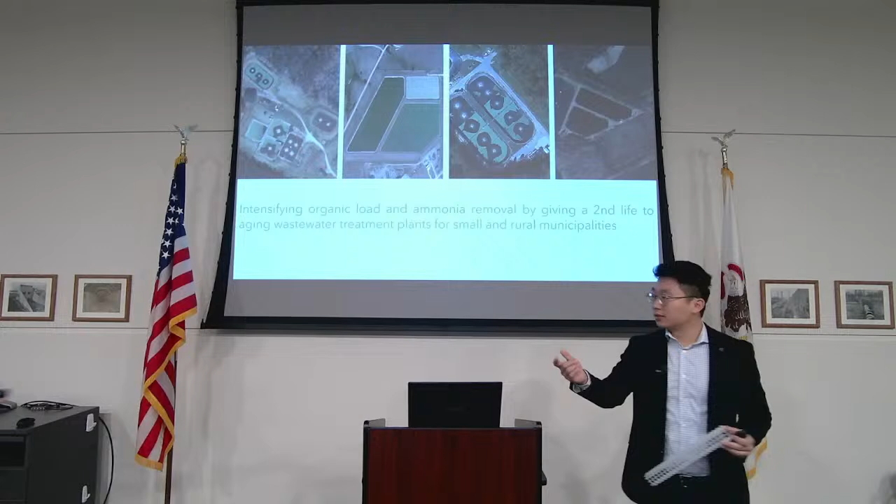I guess it's okay to stand out. So, we're specialized in biological wastewater treatment, and what I want to talk about today is how to help. So what I want to talk about today is how to help small and rural communities when it comes to their wastewater treatment plants, and more specifically, how to help them upgrade their plants to meet with higher capacity needs or changing regulatory compliances, while giving a second life to their existing installation.

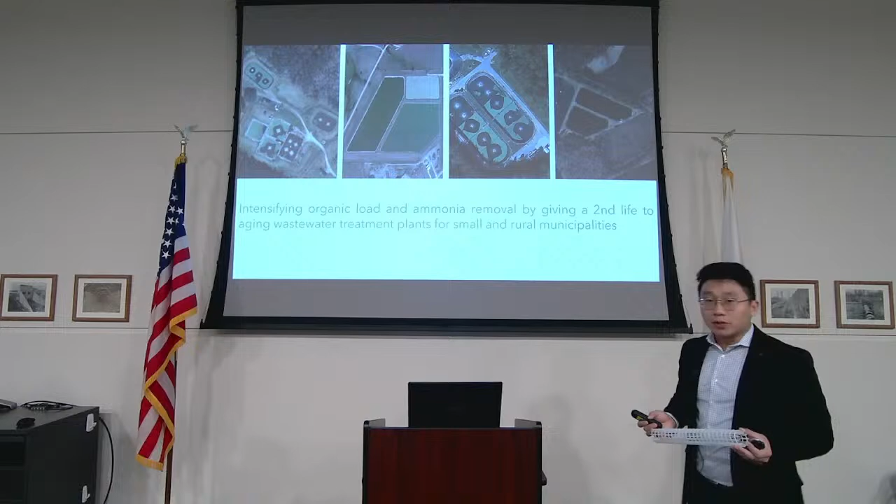So when it comes to small and rural municipality, one of the most common ways of treating wastewater is a lagoon system. It's very simple, cost-effective, and low maintenance as well. I think there are over 10,000 lagoon systems across the US, and over 3,500 in Canada as well, actually.

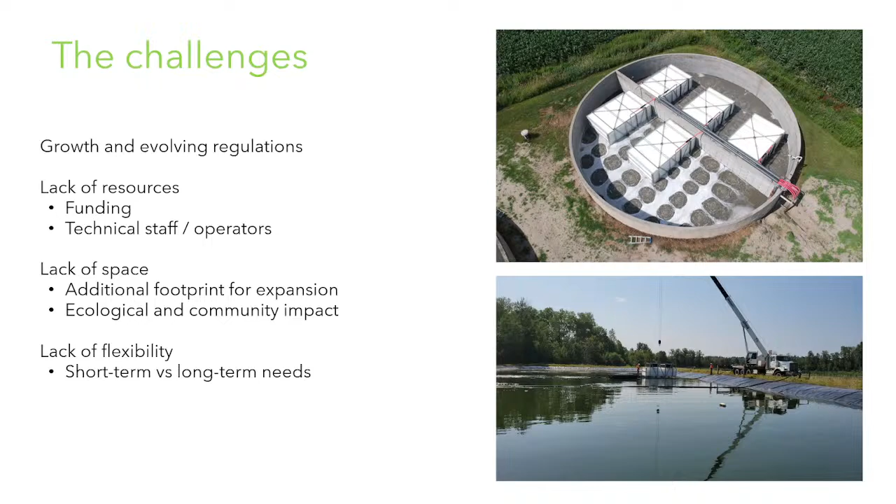And when it comes to upgrading those plants, some of the conventional methods of doing so, such as a conversion to a mechanical plant, an MBBR, or another system that would replace the lagoon process, will have some pretty unique challenges for those municipalities. First of all, the lack of resources is a big one, right? It takes a lot of capital cost to do those upgrades, and the lack of human resources as well. Often when you go with a more complex process, it takes more qualified operators to do so.

The lack of space could be a big factor. Adding footprint will remove from green areas around the wastewater treatment plant and could have ecological community impact in that way. And most importantly, I believe, is the lack of flexibility. When you make permanent infrastructure changes to what you already have, you have very little flexibility. You pretty much have to design your upgrade for the next 20 to 30 years, whereas there are other alternatives that can allow you to give a second life to your existing plant that could provide you with more flexibility.

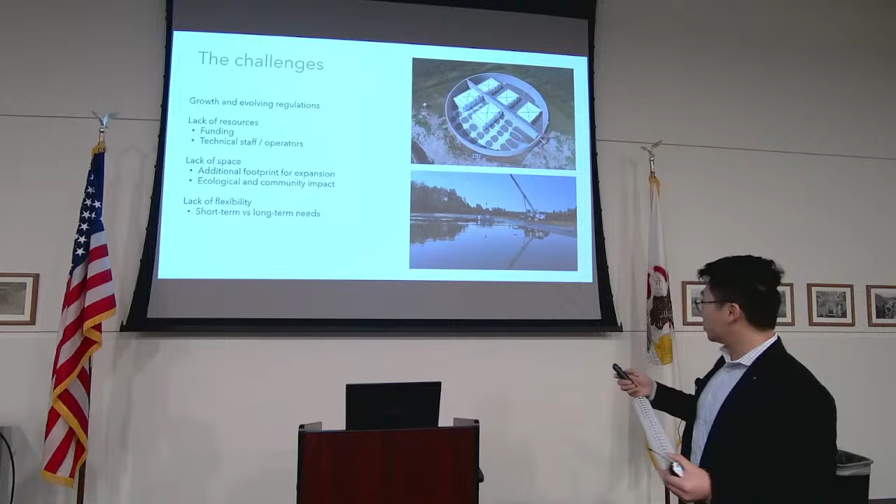So you can see a few examples of what I'm talking about here on the screen. So the approach that I want to talk about is to basically submerge modular fixed bed into an existing lagoon or an existing bioreactor to enhance and intensify the existing treatment.

All right, and like I said, not only lagoons, other types of bioreactor as well could be a good fit for this. You can see the first picture up there is a concrete tank. So there's different versions of this type of solution that's available for different types of bioreactors. But yes, lagoons are a great fit as well.

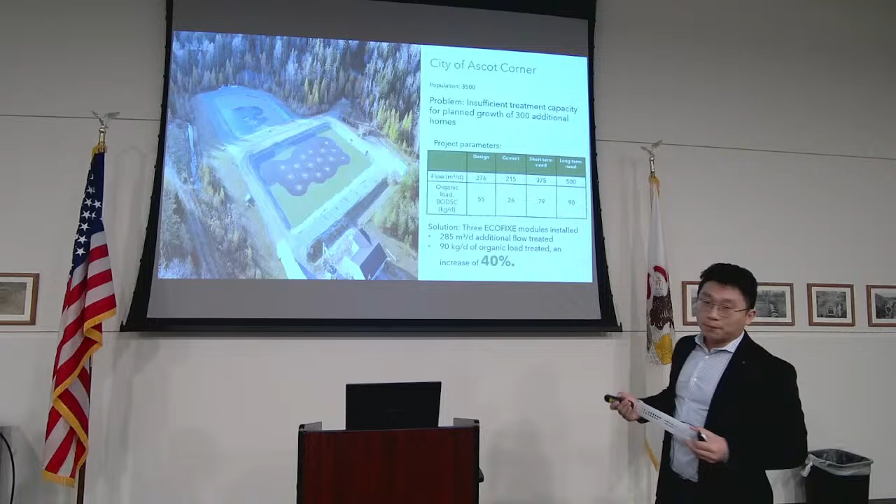And the city of Ascot Corner is a good example of what we discussed thus far. This is a municipality in Canada. They operate an aerated lagoon with 2 cells. It's a small municipality, 3,500 people. It's a pretty typical situation from where I'm from. And the issue is that they needed to increase their BOD treatment capacity by 40% to accommodate their growth, so 300 additional homes.

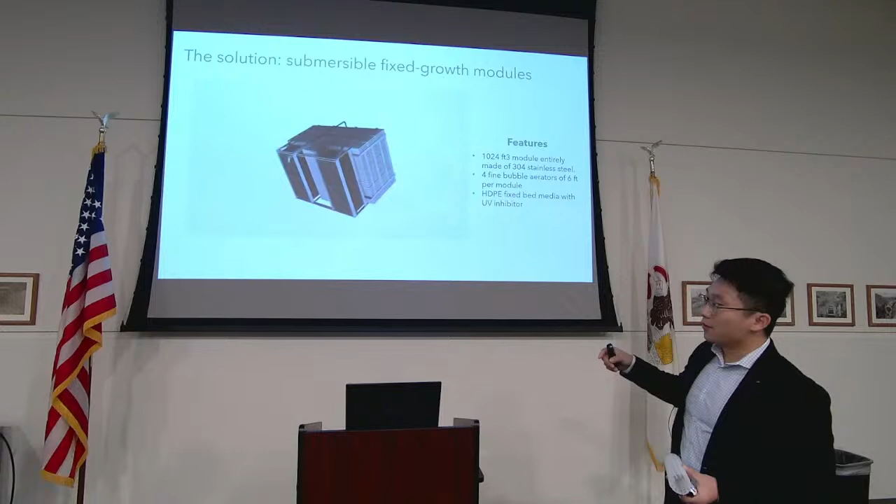So for the city of Ascot Corner, what they decided to go with is a modular fixed growth system, like the one you see on screen here. So I'm going to play a little animation. This module in particular is called the ECOFIXE module. It has an external structure made with stainless steel. The white section in the middle is the fixed bed media, which I have a piece of it right here. And there's also an integrated aeration system at the bottom of each module to feed it with air, but to clean it as well.

And the module itself is really simple. There's no mechanical parts on it. It's all stainless steel and plastic, so it's easy to maintain. And it was designed this way because it was designed for small and rural communities.

So this type of solution can be used to treat different contaminants. In this case, we're going to take a look at the BOD removal with the ECOFIXE module, as well as cold water ammonia removal with the BIOFIXE module. So both can be combined within the same installation if needed to treat both BOD and ammonia.

And how it works is really simple. You probably guessed it already. These are going to be submerged into an existing bioreactor to provide the biomass with a surface to colonize. So that's going to help the bioreactor maintain more biomass and treat more loads of BOD and ammonia, while at the same time optimizing the existing aeration as well, or to add aeration if there is none.

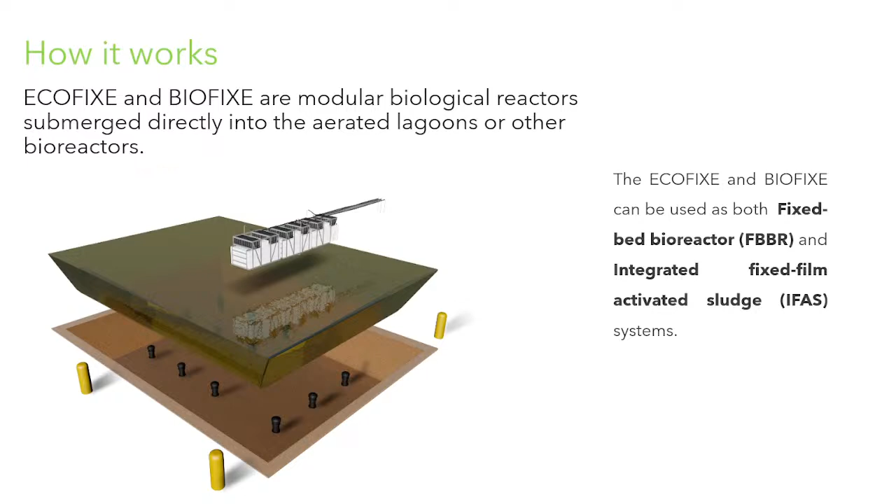So you see an example for an aerated lagoon here, where the modules are going to be submerged in between the existing aeration lines and then anchored with steel cables to the shore. So they're basically FBBR or IFAS solutions that come in a modular form that's been adapted to help small and rural communities.

As I mentioned before, there are different versions of this type of module. The anchored version can go into a SBR, activated sludge, with the same principles, whereas the floating version was designed for lagoons.

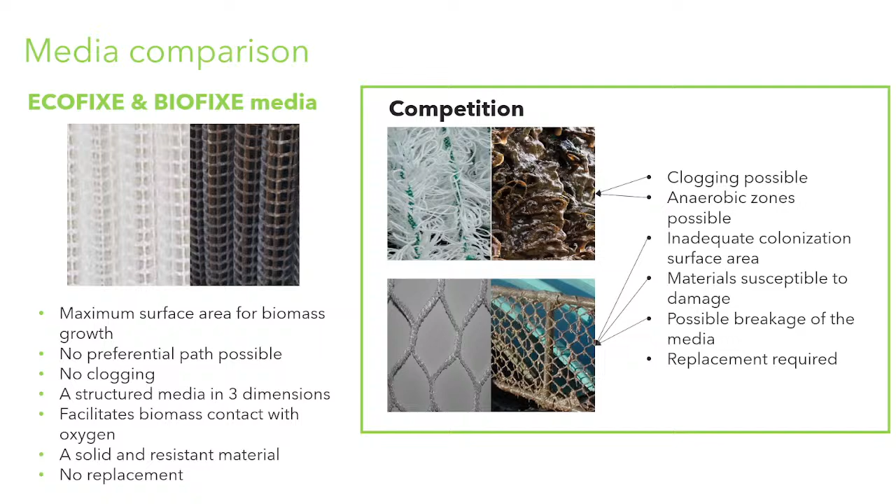So the choice of media material was very important for the city of Ascot Corner. Fixed bed media is nothing new, it has been around for a while. It's a proven technology, but the design of the media was often a weakness. Often you will be a strand or rope-like material, just like the ones you see here, which will be great for biomass colonization, but will create a lot of clogging as well.

So clogging will create anaerobic zones, will make wastewater bypass the treatment, create short-circuiting, for example. So that would require regular maintenance, and it's also material that could break over time, so it will require replacement as well.

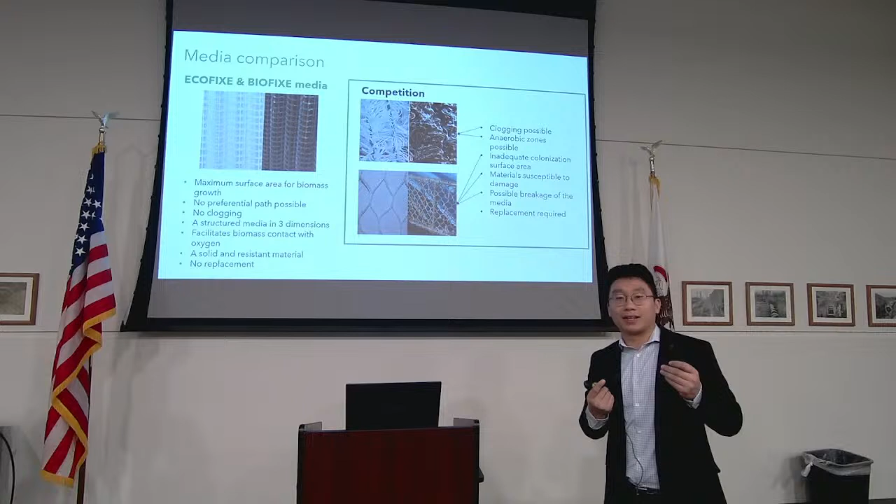So what we did with the Ecofixe and Biofixe media to address those concerns is that we made it in a three-dimensional structure. So it's a shape of a cylinder that has a lot of surface area for biomass to grow, but also plenty of space in the middle to avoid clogging. That piece of media is installed vertically inside of the module so that the aeration can hit it at the right angle to clean it. It's also a rigid structure made with a thick plastic, so it's not going to degrade over time, and you won't need replacement.

Now, when it comes to the integrated aeration system, it's used for a lot of different reasons. First of all, it's going to push air and oxygen into the media and the biomass to feed it, but also it's going to create an action zone. So that's what you see illustrated in red right here, basically increasing the surface area of the treatment to avoid short-circuiting and make sure that the entire flow of the wastewater is covered. Maintenance is also done directly through the aeration system.

So the modules will remain inside of the bioreactor. You don't need to remove them. And you simply need to adjust the aeration every 4 to 6 weeks to basically blast it with air and clean it, remove any debris.

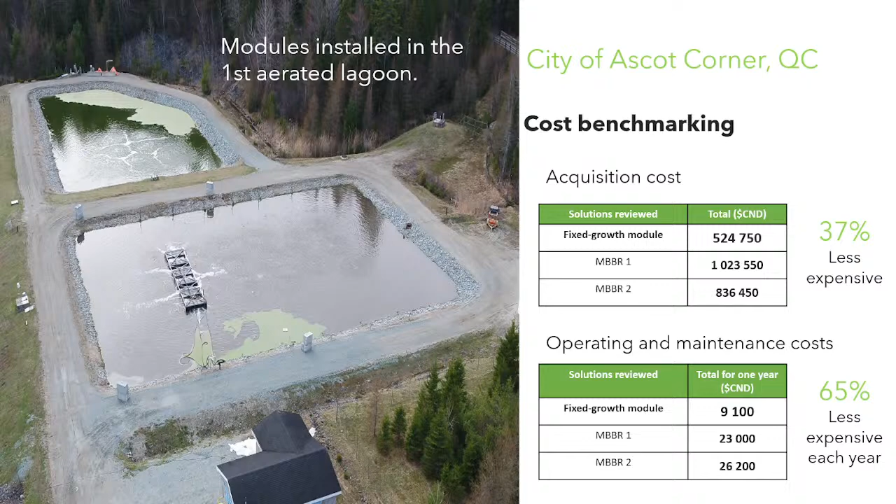So you can see the installation for Ascot Corner right here. So 3 modules submerged inside of the first lagoon. You can see that the line of module is perpendicular to the direction of the wastewater. We positioned it that way to maximize the contact with the wastewater, and that combined with the action zone will help treat the entire flow. Then the modules are connected to those concrete blocks with steel cables to keep them in place. And right here, you can see the manifold.

So this is where the connection to the air of the blowers will be, and also where the valves to adjust aeration for maintenance will be as well. In this case, Ascot Corner had existing blower systems and existing aeration system that had enough residual capacity, so the modules were simply connected to the existing aeration line.

An engineer compared the cost of the Ecofixe fixed growth module with a few standard MBBR solutions, and it came out pretty favorably for the fixed growth module, both on the capital cost and on the O&M cost as well.

For Ascot Corner, the economic advantages were pretty obvious. They were allowed to give a second life to their existing lagoon rather than add infrastructure or change it to a more complex process. So they save a lot of money in terms of the capital expenses and also in terms of the recurrent O&M cost.

Flexibility is a big factor as well. If we just go back here, you can see that the lagoon still has plenty of space to add more modules if they want. So not only will it help them with their current objectives, but in the future they can still add more modules in the lagoon, and even add Biofixe modules in the second lagoon if they ever have a more restrictive ammonia limit. That's a level of flexibility to deal with the changing regulatory landscape and your growth as well.

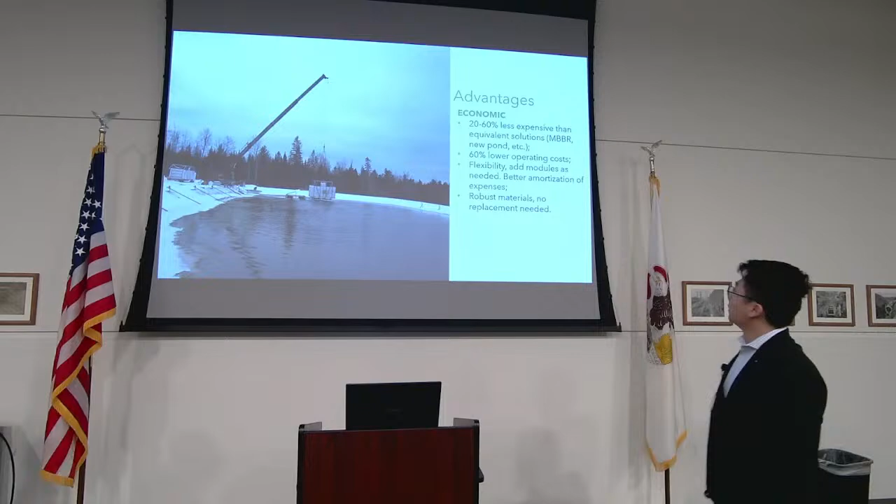So here you can see the assembly of...

It is really simple, and that's the goal, is to make it easy to operate and to maintain. Those blocks of media are made with those cylinder shapes that you saw, fused together with heat and then inserted into the stainless steel structure.

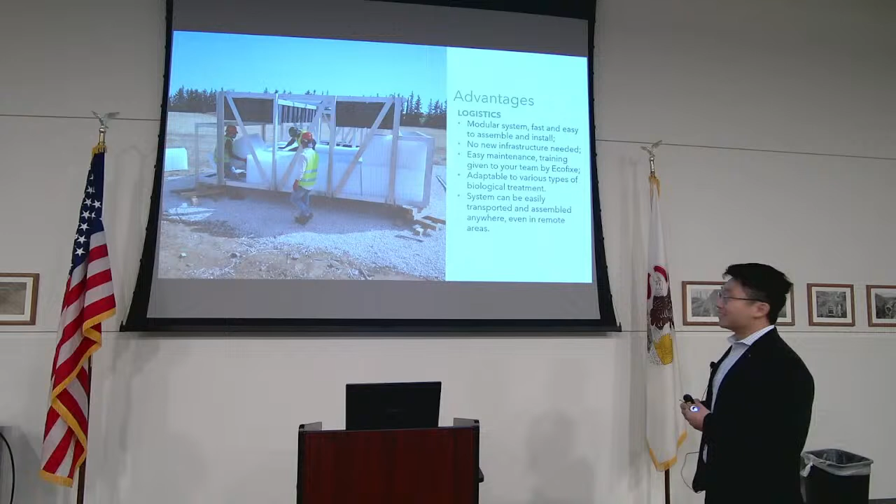Assembly and installation is a big plus as well, because that can be done pretty quickly, usually within a week or so, and without having to disturb any of the ongoing operation. Also, it is shipped in pieces and assembled on site, so if it's in a rural area, it will be easier to reach as well.

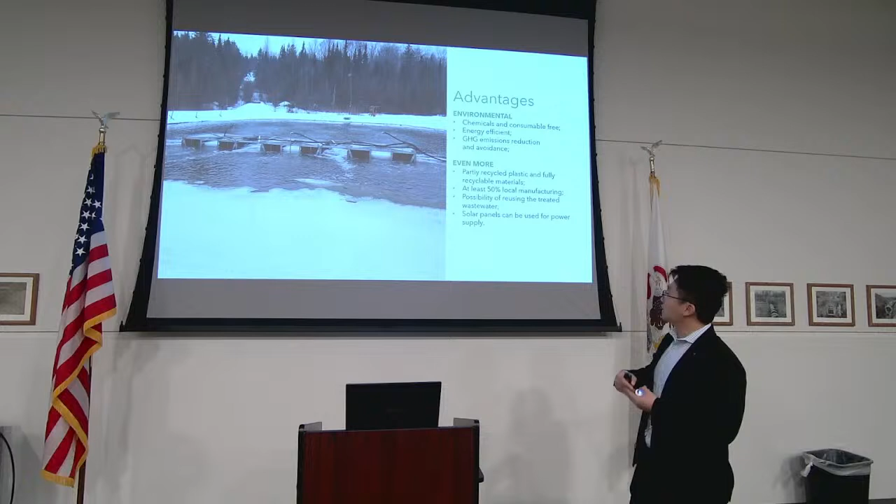You can see the module submerged here, as well as the aeration happening around it. And of course, by enhancing biological treatment, we're avoiding the use of chemicals and consumables, and it's very energy efficient as well, by optimizing aeration but also by allowing the bioreactor to maintain more biomass and treat more loads of contaminant per kilowatt of energy consumed. As you can see, there's not an issue here.

We've been having freezing weather the past couple of weeks here. This will continue to work. It's working in Canada, obviously, so freezing is not a factor.

Another important factor is that most of the material can be built locally. The media, obviously, is the proprietary part, it's going to be built in Canada, but the stainless steel can be built locally, and that's the majority of the equipment cost. So any BABA requirements, this type of solution can easily comply with.

Now, when it comes to performance, because that's the most important part, right? It can be easy to maintain, it could be simple, but does it perform?

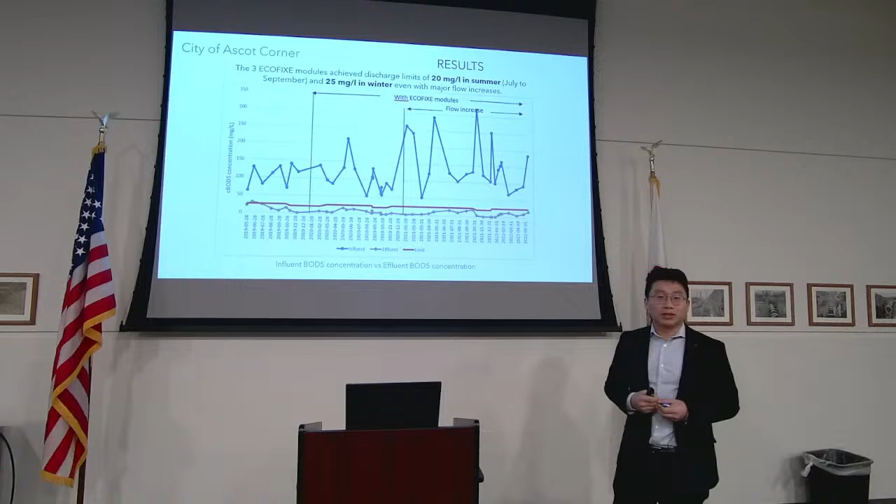Now, the good news is that the same three modules that were submerged into the lagoon were still able to handle the additional load and treat their BOD level at the effluent below their limits consistently — that's 20 milligrams per liter in summer and 25 in winter. So essentially, Ascot Corner was able to, simply by submerging those modules, increase their treatment capacity by 70%, and really reach their long-term goals without having to change their existing lagoon process or add any infrastructure.

Now, TSS could be a concern as well, but the good thing is that although the Ecofixe module was not designed for TSS removal, it does have a positive impact on its final results. That's because having additional biomass in the bioreactor creates a flocculating effect — the biomass attaches itself to the suspended solids and helps them settle down more efficiently, which improves the final results in that regard as well.

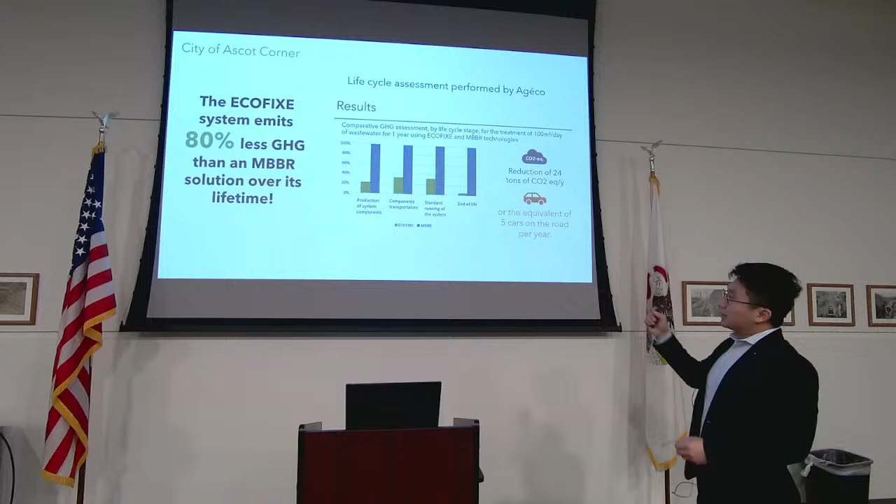So here is what's called a life cycle assessment. This is done by a third party to compare the impact on greenhouse gas emissions of the different alternatives that were studied. In this case, the third party found that the ECOFIXE system will emit 80% less greenhouse gas than an MBBR over its lifetime, so from production to the end of life, while considering infrastructure, energy consumption, etc. So it is a significant impact.

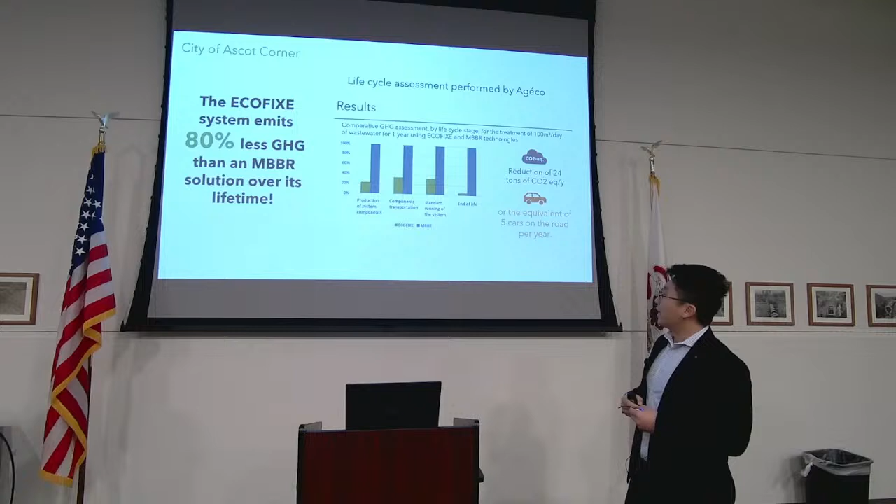That's the equivalent of 5 fewer cars on the road per year for every 100 cubic meters per day of wastewater treated. And not only does this type of study help quantify the impact on the environment, Ascot Corner was also able to get a very nice green technology fund from the government of Canada to fund a good portion of their project.

Now, ammonia removal could be a big issue as well, especially in lagoons in cold climate communities, just like in Canada. Here we have an example for the city of Drummondville, and you can see before they did anything to their lagoons, ammonia removal was quite a big issue, as their effluent was below the 5 milligram per liter regulation for only a couple of months during the year. So a lot of work to be done here.

And now after the BIOFIXE module was installed inside of the lagoon, after a quick ramp-up period, the effluent was lowered to below 1 milligram per liter consistently. And that's even during the coldest months of winter here, December, January, February. It gets pretty cold. Minus 20 Celsius, minus 30 Celsius is pretty common in that area.

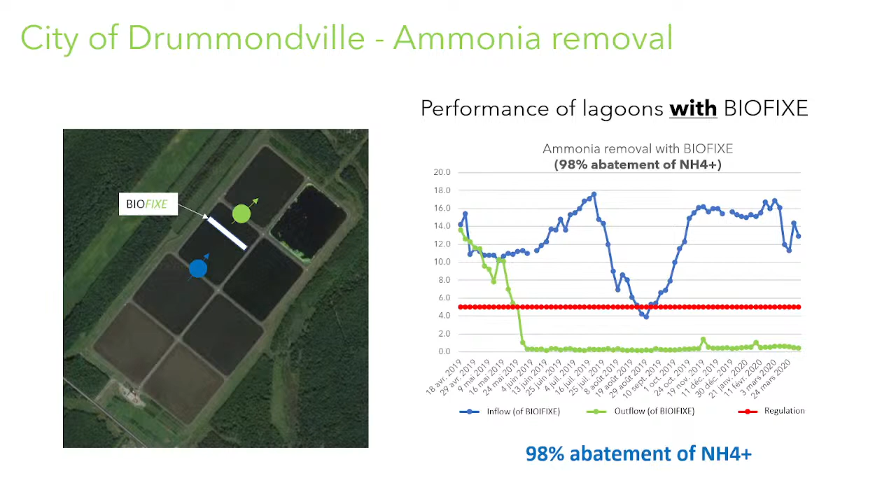Not sure what that is in Fahrenheit, but it's cold, trust me. Yeah.

So with the BIOFIXE, you can expect a removal rate of 98% or more of the ammonia load that's attributed to the module, and it can really allow the lagoon to maintain effluent below their limits year-round without heating the water. I should probably explain how that's done.

One of the things we did with the BIOFIXE is that we apply a coating of biogel on the media. That's something that was developed with research centers in Canada. That coating of biogel will protect the nitrifying biomass, but also increase the surface area for them to colonize. So this is the way that we're able to maintain biomass in cold water.

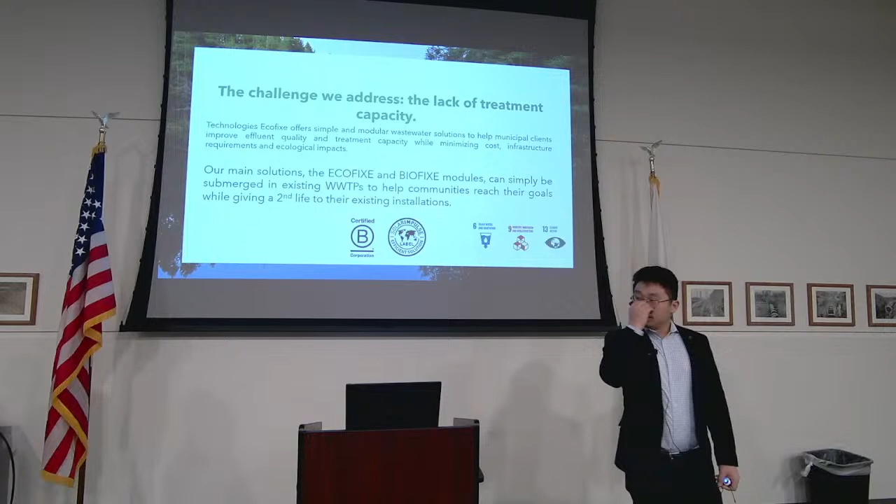So it's kind of like adjust and put a timer, go do something else, and then come back to it. That's why the maintenance is pretty simple, because the modules stay inside of the lagoon. You don't need to remove them. So all you're doing is reallocating which way you want air. Yeah. So it isn't going to take the air away from your operation? So are you going to upsize your blowers? I don't believe so, unless you had a larger capacity population, maybe.

My assumption, but we can always look into it if need be. It is a case-by-case analysis. In that case, it depends on what you already have, what you're trying to treat, and what your objective is. So it'll be hard to.

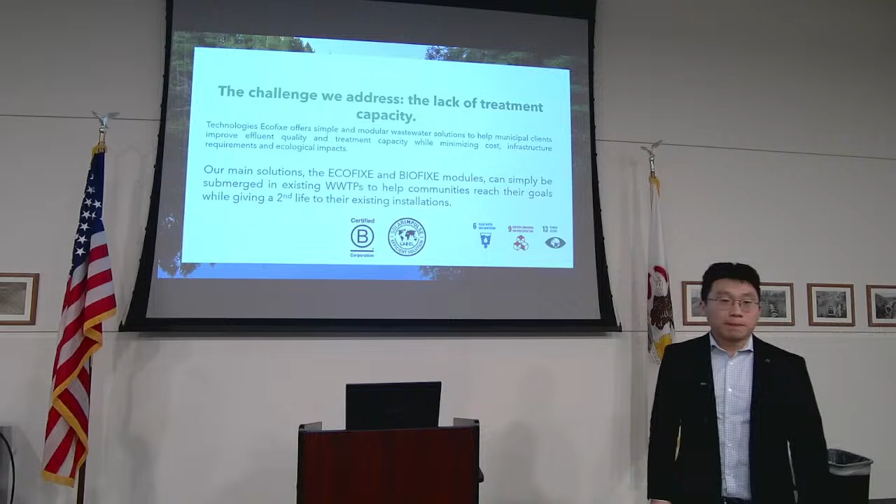Yes, sir. Now, normal operation is there constantly, right? Yes. Off, on, alternating. Constantly, yes. And it's possible to adjust it as well, depending on the season, right? Sometimes during spring, there's more pressure on the system. You're going to put more air. Maybe during summer, you can lower it. So that's all part of the operation and maintenance optimization to keep energy consumption low. Yeah, absolutely. So, all right, let's go back again.

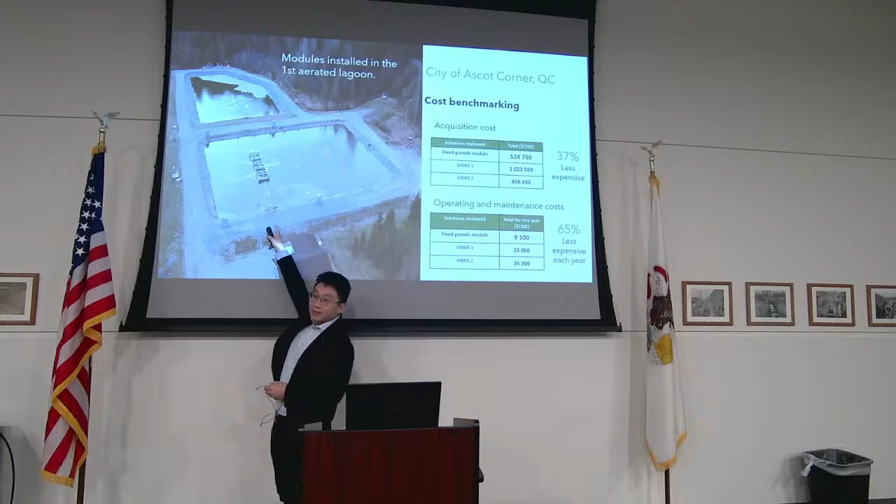So you see right here, this is the manifold. So this is where the valves will be. And then these will be connected to blowers. Yeah, there's 3 flexible hoses to feed the 3 units. They're connected to the same manifold, and then that manifold is connected to the blower.

So blowers could be provided as well as part of the package. And also, if utility building or space is an issue, adding a small weatherproof cabinet to house the blowers could also be an option, as long as there's electricity on site. Yes, sir.

Good question. No, not yet. Soon. We're working on it. So there are a lot of installations in Canada where the climate is really cold, so we have a lot of performance data from those for comparable situations in Illinois, and so the first installation in Illinois is still in the works.

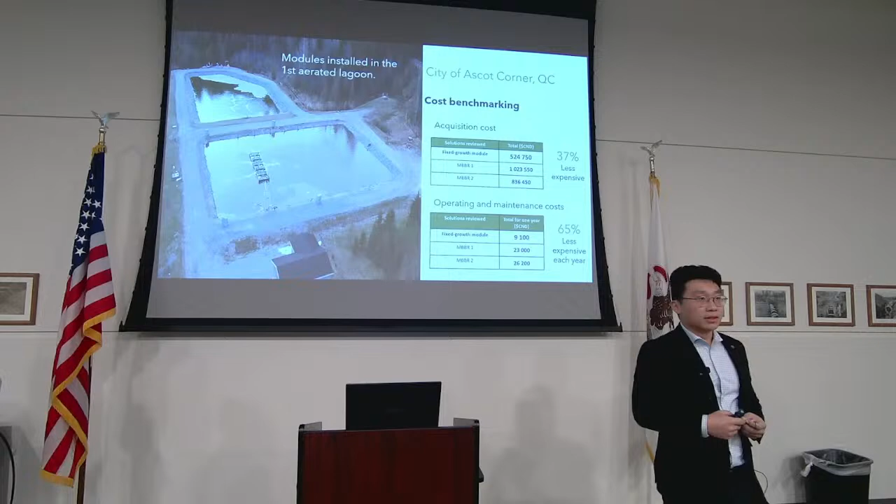That's a good question. So with any biological treatment process, removing the sludge before doing the installation is always a good idea. So that's not an exception for this type of solution. It will help, but it's going to depend on the sludge level. If it's still reasonable, then it wouldn't be an issue.

And the good thing with the floating module is that you have plenty of clearance between the bottom of the lagoon and your module. So if you're going in with a drag to remove the sludge, you don't necessarily need to remove the module from the lagoon. You can go under, or you can disconnect one of those cables, kind of move them around, and then clean the sludge that way.

We usually consider 15%, 20%. Over that, a removal is probably due. So I'm not sure in Illinois what is the frequency, but in Canada we usually do it every 2 years, 3 years, to keep it at a consistent level. But again, that's something that you too, right?

Almost sounds like this would be the answer to global warming. I wouldn't go that far, but it is a good start.

So, is this designed specifically for lagoons, or if your plant is having problems with ammonia discharging, could you put that possibly as a flow through on the tail end of the plant? Absolutely, yes. So the floating version is designed for lagoon, but that can be adapted. So there's the anchored version that can go into a concrete tank, and it's also possible to customize it, right? It's basically media aeration that's inside of those modules. So you can size it the way you want and put it inside of a precast tank or something like that.

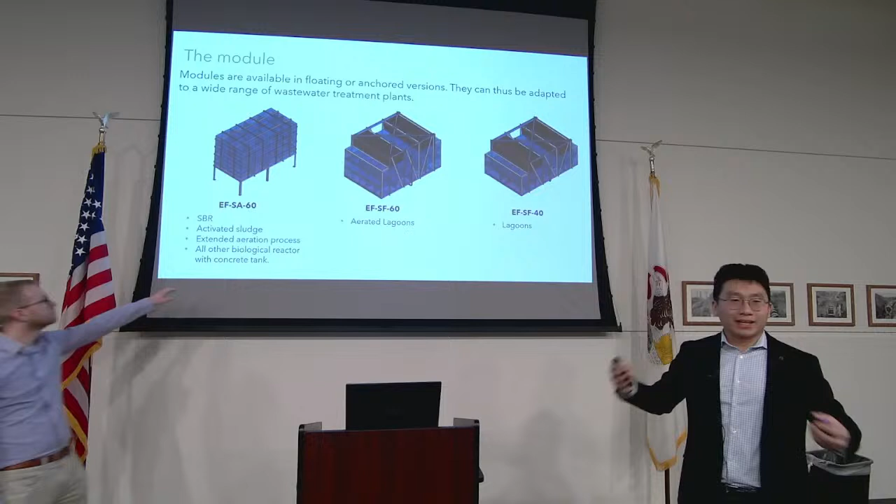Like we are working on a project right now in Illinois where it's a sand filter, recirculation kind of situation where we're adding an additional tank at the end to treat ammonia that has our components inside. So it can be adapted to your situation. Right here. That right there is an example. Yeah. You can see they're actually put in different locations in one kind of same space.

And one thing I should probably mention is that although retrofits are most of our focus, you can also include those in a new plant, right? By including that in your design, you can resize your plant, make it a lot smaller. And what we've seen thus far is up to 4 to 5 times smaller in terms of the required footprint of a new plant by including the media or the module to optimize the biomass retention.

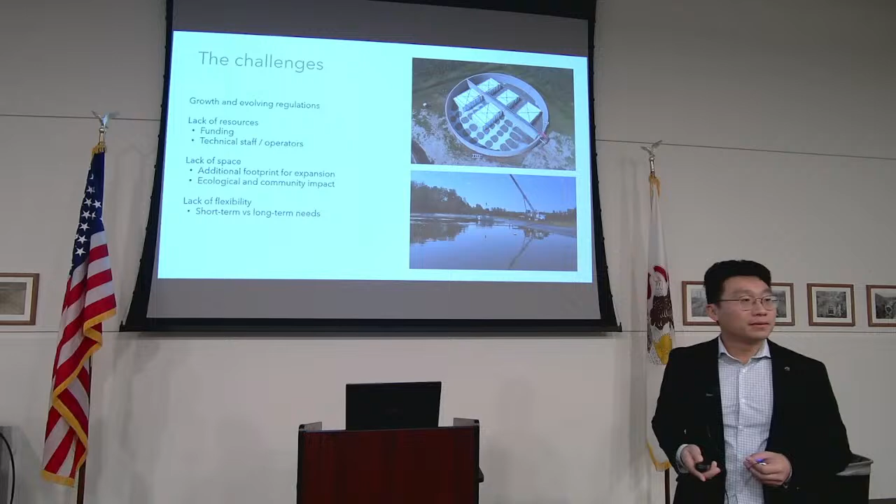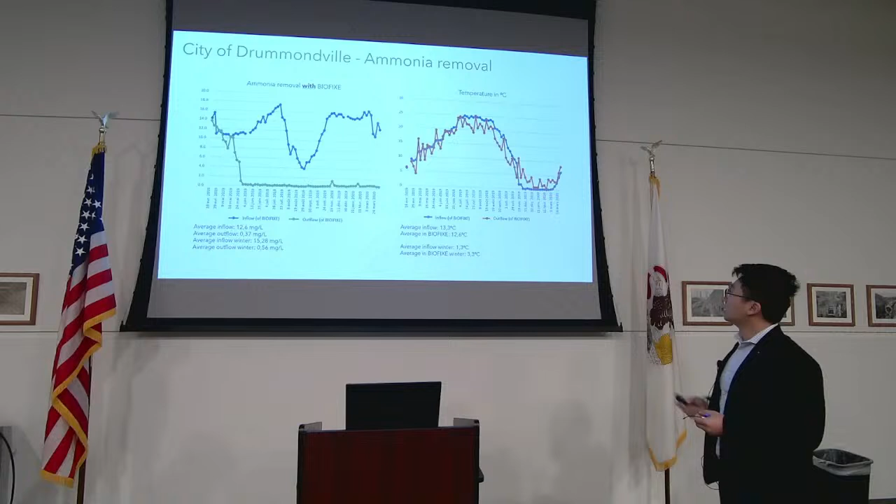Other questions? Yep. Yeah, 4 degrees Celsius, I think, from... yeah, so let's take a look at those. So you can see the average winter inflow temperature, 1.3 degrees Celsius, 3.3 degrees Celsius. So yes, you will work below 4 degrees Celsius, and up to 0 degrees Celsius, as long as the water doesn't freeze. So these were taken at the entry and exit of the BIOFIXE module.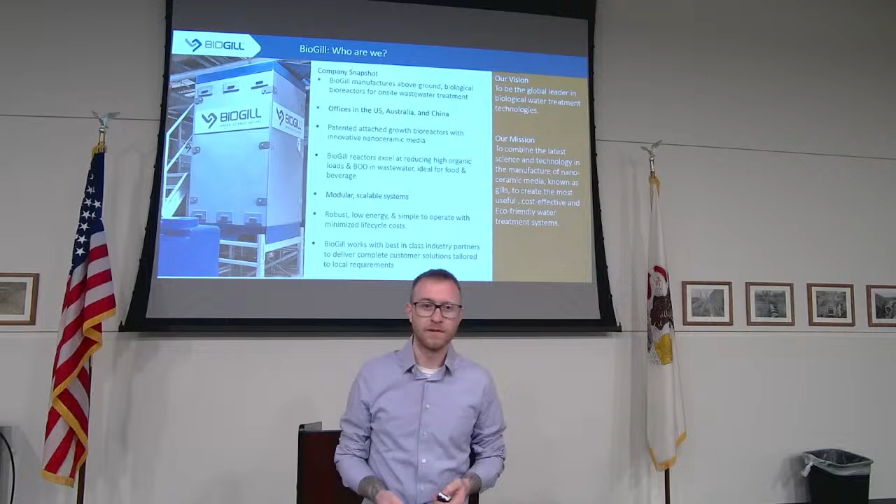All right, guys, we're back here again. We've got Alan Smith here coming up next with BioGill. Alan's got quite the track record, long history of sales, health and safety, consulting. I'll let him kind of introduce himself and give his spiel. So without further ado, Mr. Alan.

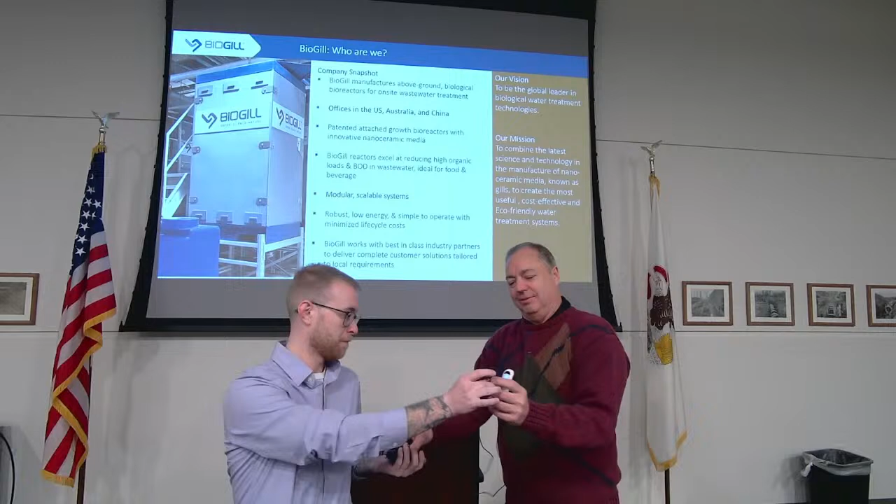How you doing? Okay, so hold that for a second. You gotta clip this on, I guess. Yes, sir. First of all, what a cool product EcoFix is, right? That's a very impressive product.

I am Alan Smith. First thing I'd like to tell you is that I'm from North Carolina. And you people, y'all are a hardy group. When I got off that plane Tuesday, and it was -3 at a wind chill of -25, I just about got back on that plane. I'm very impressed with your ability to withstand cold.

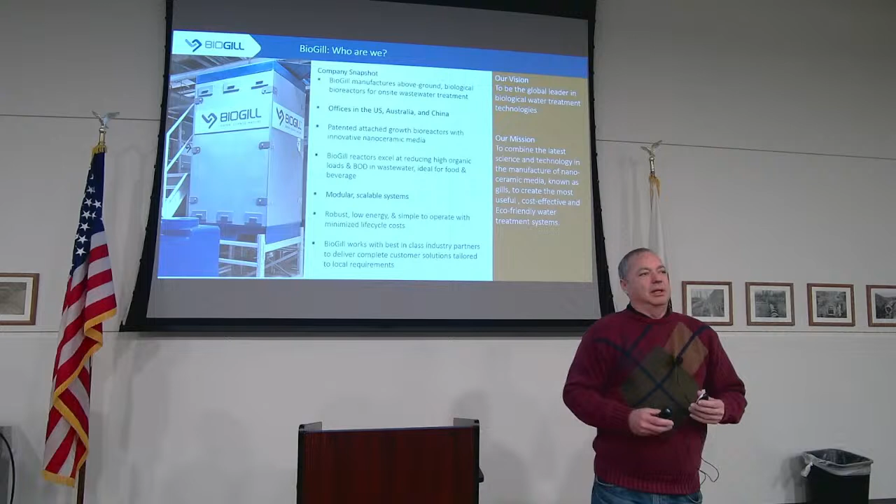BioGill, I'm the sales manager for the eastern half of North America and the Caribbean. BioGill is a relatively new company. It is, in the simplest terms, a trickle filter. But they created a very special item that they call the gill, which makes it an unbelievably efficient, in a very small space, way to remove BOD, with the added benefit of being incredibly environmentally friendly. It has an extremely small carbon footprint. And to a lot of people, that's very important.

Some it's not. But a low carbon footprint also means very low operational costs, because the energy bills associated with it are minuscule compared to most other products out there. So we're going to introduce you to it. I know this is kind of supposed to be non-proprietary, but as of right now, BioGill is the only company with this technology, so it's kind of hard to do that.

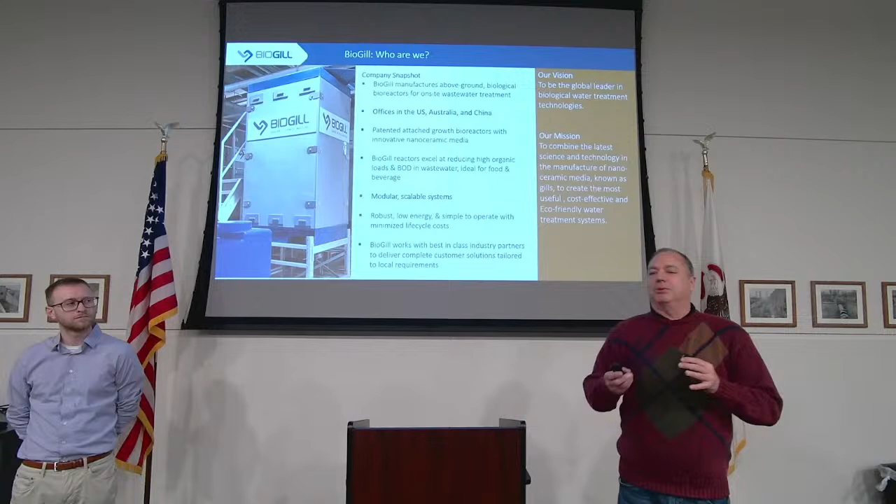But the company was founded in Australia by a couple of scientists with a government grant. And they created this medium. It's a nanoceramic material. And somehow the scientists were able to get the patent for it from the government. And they created BioGill. It's a very robust, very low energy cost, very efficient removal of BOD, COD, TSS. The government grant for the technology was in 2005.

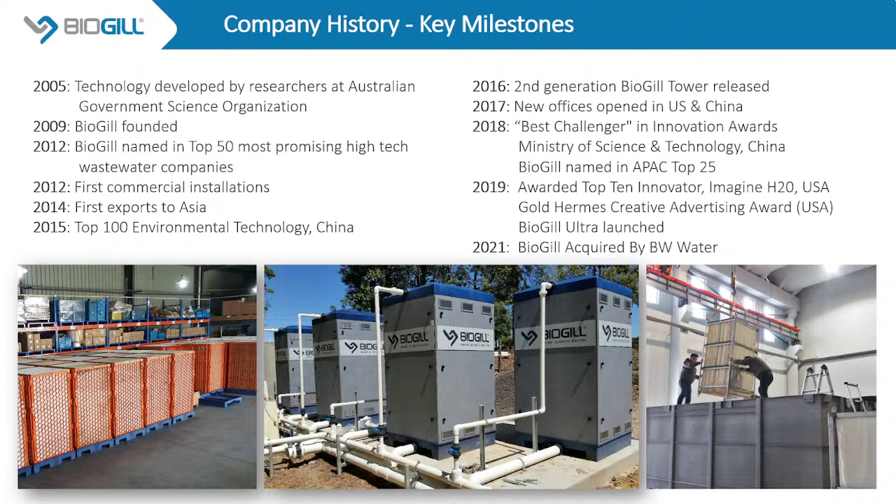We have won many awards for the uniqueness and the greatness of this product and how it works, including the Best Challenger Award, Innovators Award from the Ministry of Science and Technology in China, Top 10 Innovators, and Imagine H2O. The company in 2021 was purchased by a very large European company called BW Water, which builds municipality water treatment plants. And at that time, the stuff began to change. They recently took over for North America this year.

A little hoarse from the cold weather, sorry.

All right, so it's a very simple design. And by the way, that is an older picture. Our company is doing new marketing. They haven't delivered our new PowerPoints yet. It's all stainless steel and metal now. But your inlet wastewater is pumped to the top of the reactor from a recirculation tank. We have something called the HydroSwirl, which we're real proud of. It's a non-clog manifold that evenly distributes the water across the top of the growth media.

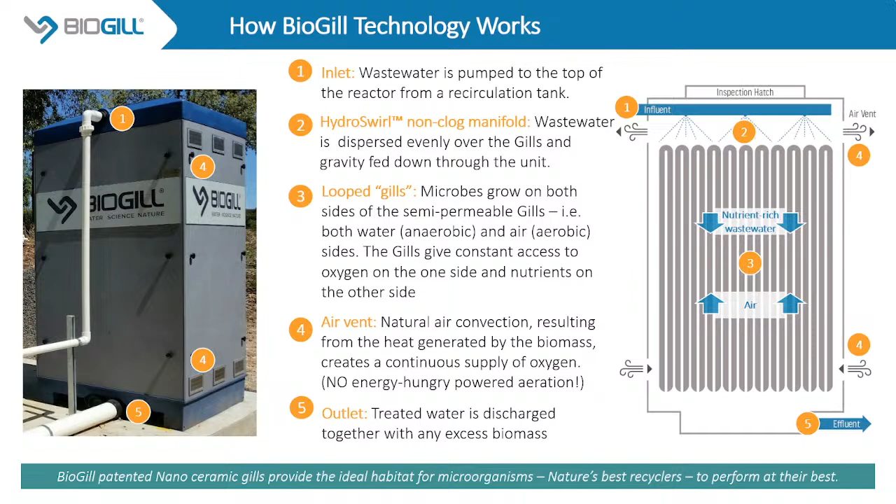And then we have our gills, and we'll talk more about the gills because that's what makes us extremely unique. The microbes grow on both sides of the semi-permeable gills. And so we have at the same time both water, anaerobic, and aerobic sides. And our anaerobic side still gets oxygen, so we don't have a smell. If you were to open up one of these guys and take a whiff, it'd smell like a shovel full of dirt. So it's a very, very low odor.

Yeah, so what's happening inside that gill is creating the perfect storm for wastewater. It's having aerobic on one side and anaerobic on another. And it passes through those gills approximately 40 to 46 times before it leaves the biofilm. The amount of BOD reduction, COD reduction. Massive. Yeah, and that's considered a cartridge. In that one cartridge, we got 2,400 square feet of growth space because of the nano.

And also, like John Tu's product, we have a biogel, but ours actually tastes better on toast. Sorry, but we have a similar thing.

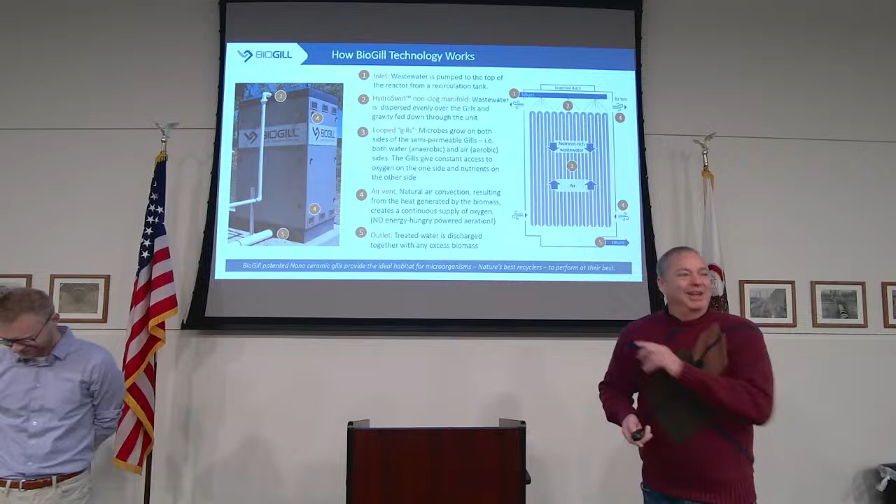There you go. The air vents, and here's another great thing about us. Yes. Oh.

So then we have the air vents here that are drawing in air from the bottom and bringing it to the top.

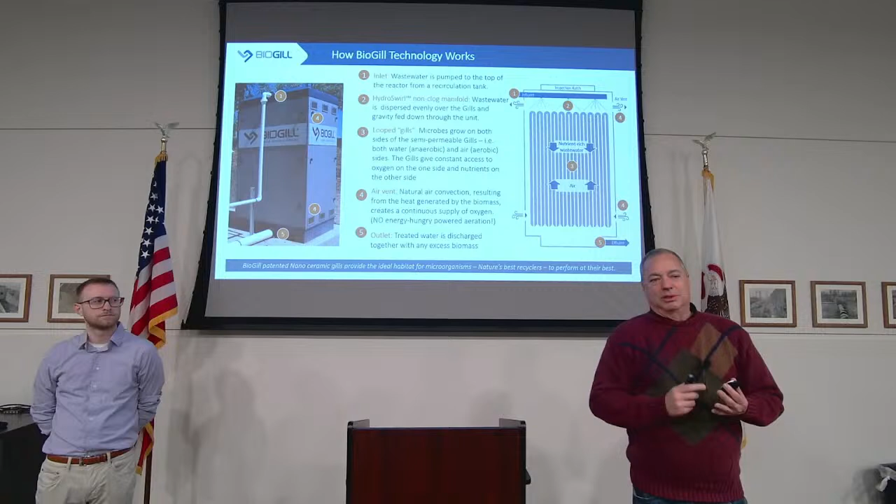One of the reasons we have such a small carbon footprint is we don't require any blowers or aeration. Because we have a dry side that's always dry, this natural convection provides all the oxygen we need for our microbes. No blowers, no aerators, nothing like that. As a matter of fact, on our very largest unit, the only thing electrical is the control panel and two 1.5 horsepower pumps.

And then the outlet is the treated water going to discharge. So this is kind of our gill, or the science of our gill. We have an air side and the water side. The oxygen transfer occurs directly from the atmosphere to the air side of the biomass. So we got oxygen coming up from the bottom to the air side.

No water boundary layer to impede oxygen mass transfer. The gills work sort of like fish gills, which is why we call them gills. On the dry side, the gills allow oxygen to go through to the wet side to provide oxygen to the bugs on the wet side. The wet side lets the nutrients go through to the dry side, feeding the bugs and removing BOD.

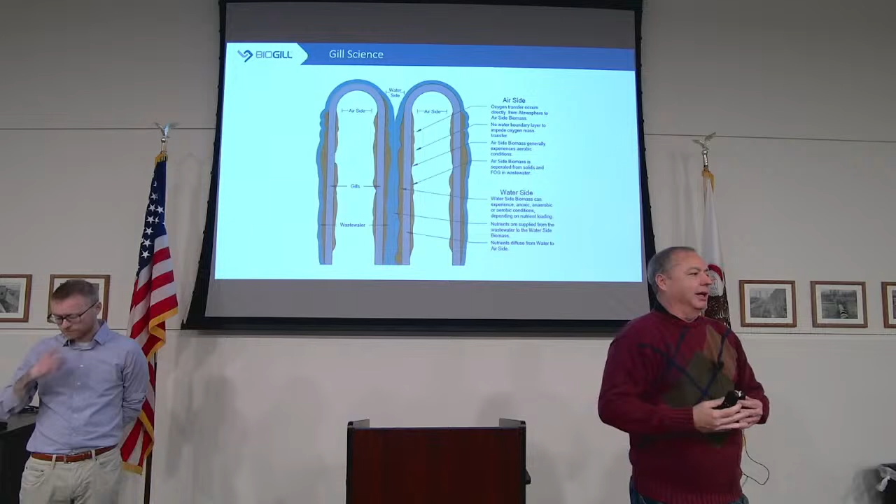We're really good with FOG because of that, fats, oils, and greases, because it's very difficult to remove FOG in a submerged environment. Because our dry side is dry, we get good contact with the fats, oils, and greases suspended when they pass through the gill layer. So we're very good at that type of removal.

The air side biomass is separated from the solids, like I said, and the energy or the food goes back and forth. The water side biomass can experience anoxic, anaerobic, or aerobic conditions depending on the nutrient loading. The nutrients are supplied from the wastewater to the water side biomass. The nutrients diffuse from the water to the air side. And it's a very unique system, and it's very, very efficient.

And again, in a cartridge, you're going to have about 16 of these loop gills. A cartridge is about 4 foot by 4 foot by 7 foot. Very small footprint.

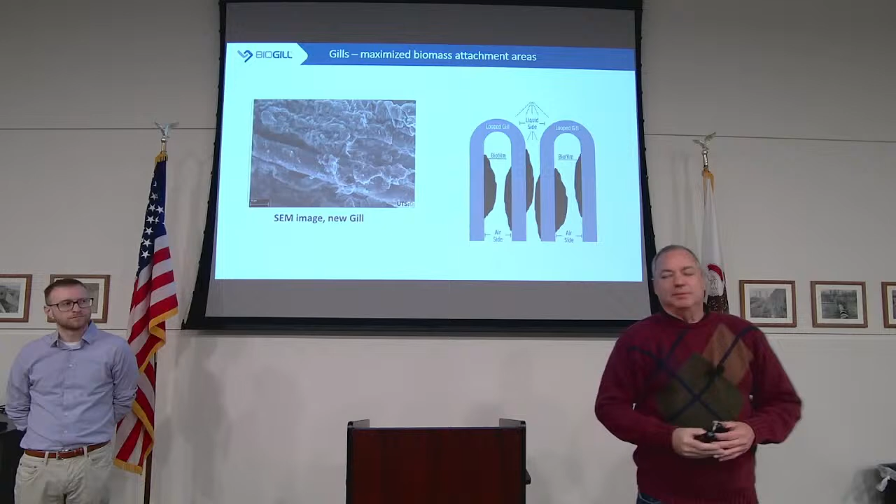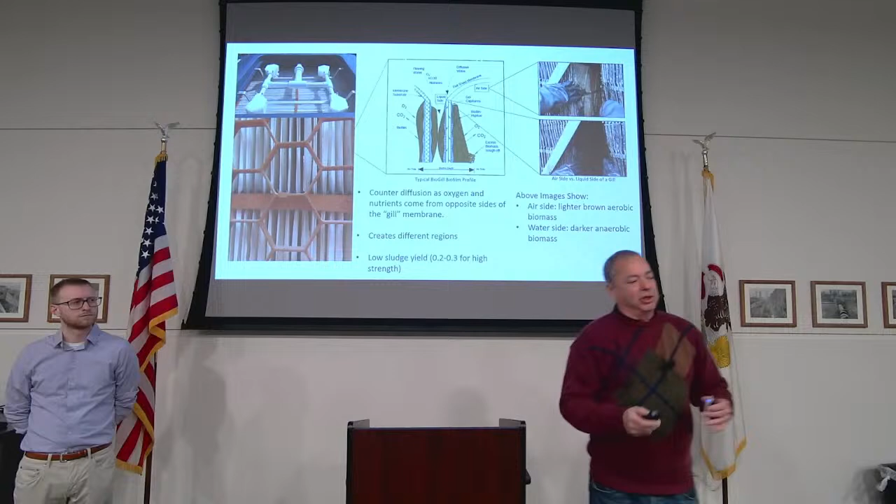And our sludge yield is very low. Our sludge yield for high strength, 4,000 BOD or higher, is about 0.2%, 0.2 to 0.3%. And it's good sludge, it's bugs.

So here's how we kind of fit in. Side streaming a high strength water if you need it. After you do your screening or solid removal and your chemical balancing of pH, we're going to be right there. And then you do your sludge management and your discharge.

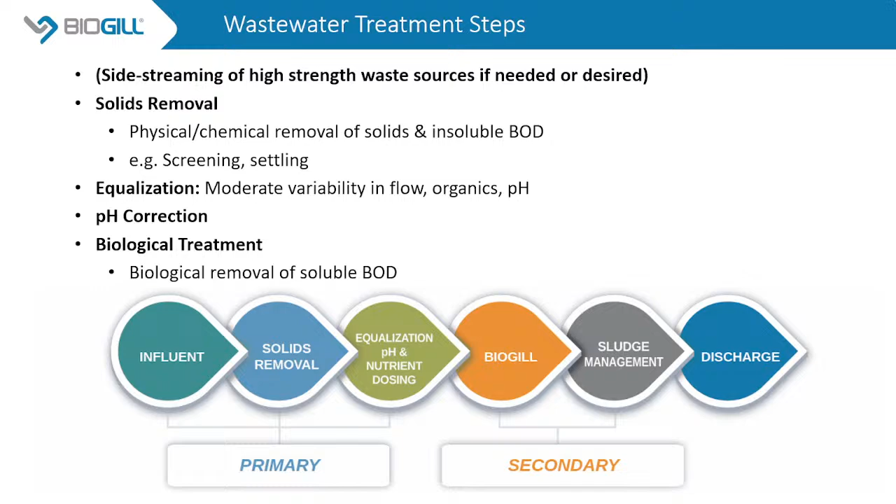And as long as it can be eaten, right, we can remove it. If you're getting into metals and things like that, we're not going to do anything. We're strictly organic, and there are some chemicals that won't work with us, but they're very few. We're actually doing a project for a company that has a low amount of cyanide, but the cyanide aerates when the HydroSwirl is spreading the water over the gills, and it's not enough to kill our biomass.

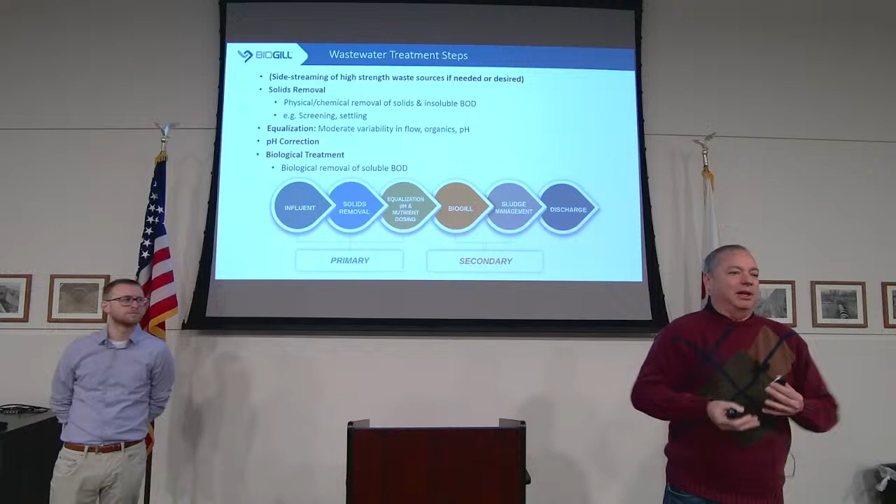If you do something bad and shock the system very badly, like a tanker truck of Clorox dumps into it, and you kill all the bugs, you simply hose them off. And by the way, that's the maintenance on this unit.

The maintenance on the biogills is very low. It doesn't require a level 1 or level 2 operator. It doesn't require a licensed operator at all. We have these things in breweries where the local bartender is the BioGill guy.

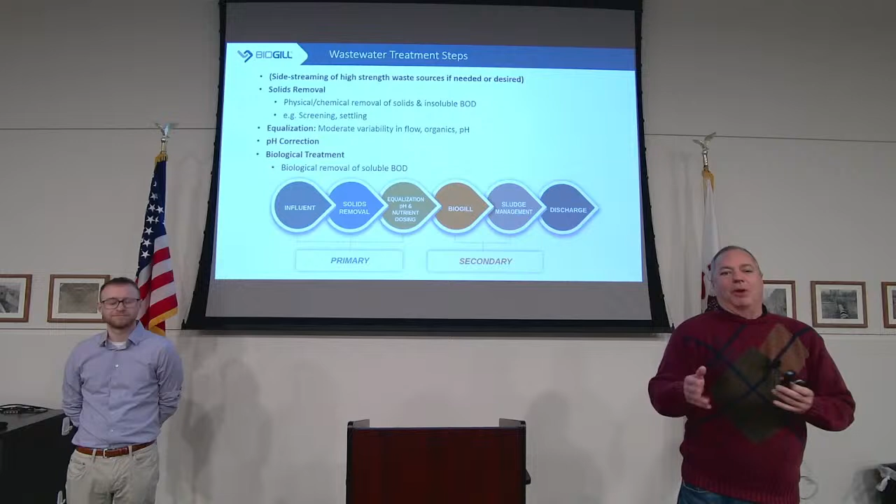Typically, all you want to know is, are the pumps running? And then every 2 to 3 weeks, depending on your nutrient loading, you literally open a hatch and hose off the extra biomass.

Hey, you see the game last night? Yeah, okay, cool, pretty good, right?

You just stand there, with a water hose, and hose off the extra biomass. That's the maintenance on it.

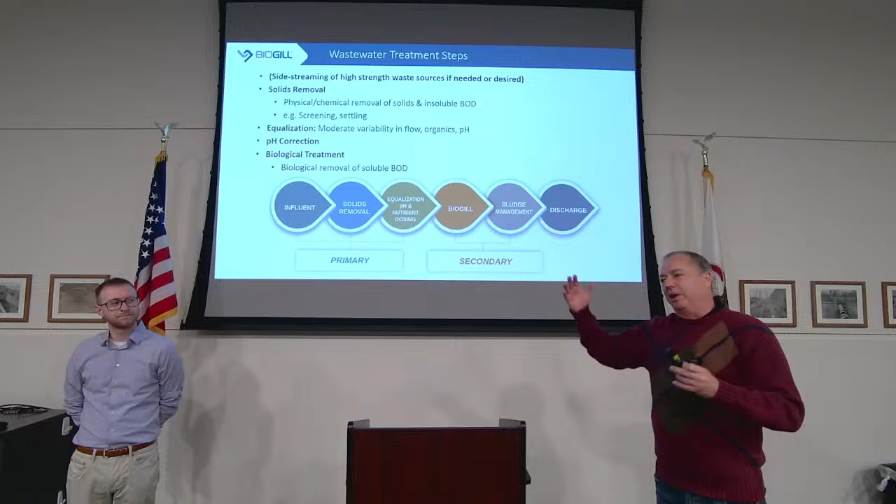An hour, for a unit like our biggest unit, the Ultra, you're looking at an hour every 2 or 3 weeks, hosing it off, and then checking it daily to make sure the pumps are running and all your connections are good.

We estimate, I'm going to show you some OpEx cost comparisons and electrical usage comparisons. In it, we put in 8 hours for 2 Ultras, which is 20 cartridges a week, but it's nowhere near that much. We just did it to try to make it look more reasonable.

Some of the great features: very simple to install and operate. A unit has 3 pipe connections and 1 110-volt connection. We can also do 24 volts for the control panel. Very easy to maintain, as I just told you about. It's very modular and scalable.

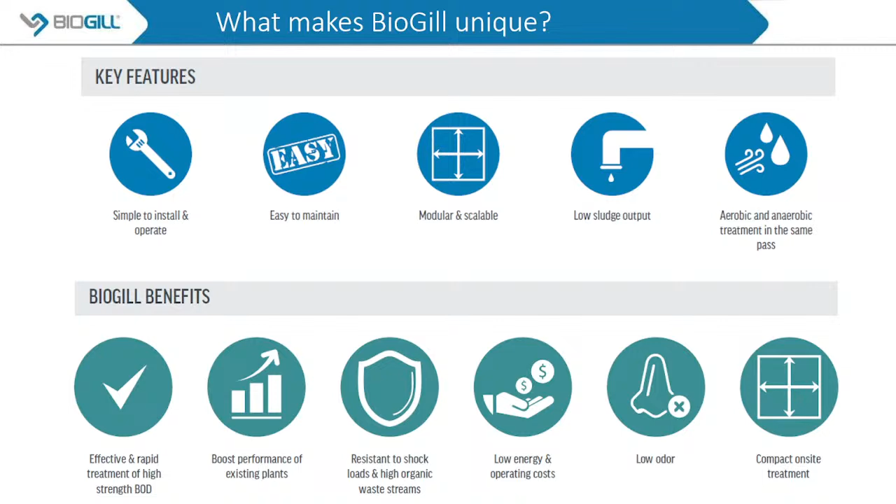We have lots of systems where we go in and put in 4 cartridges, and the company's planning on expanding or doubling their capacity in 5 years. They don't have to do anything else, they just add more cartridges. As their volume goes up, they add more cartridges.

And it works. We do a lot of stuff in North America with municipalities. One of the first orders GasVoda got was a small community in Wisconsin. Life was good, everything was fine, and a microbrewery came in and completely overloaded the city's wastewater treatment plant. So the city contacted us, and we put in our system at the brewery to fix the problems they were having with the municipality.

In Beaufort, South Carolina, there's a little island a company got. It's all marsh and wasteland. A company is going to build 2 high-rise condos. The municipality said it was too difficult to pipe the water back to the system. The EPA said they could discharge into the marsh if they were 25 BOD or less. So the municipality is buying bioreactors from us. They're going to install them in the basement of the 2 high-rise condos and bill the condo owners, and we'll clean the water down to 25 BOD and discharge into the marsh. So there's a lot of creative opportunities.

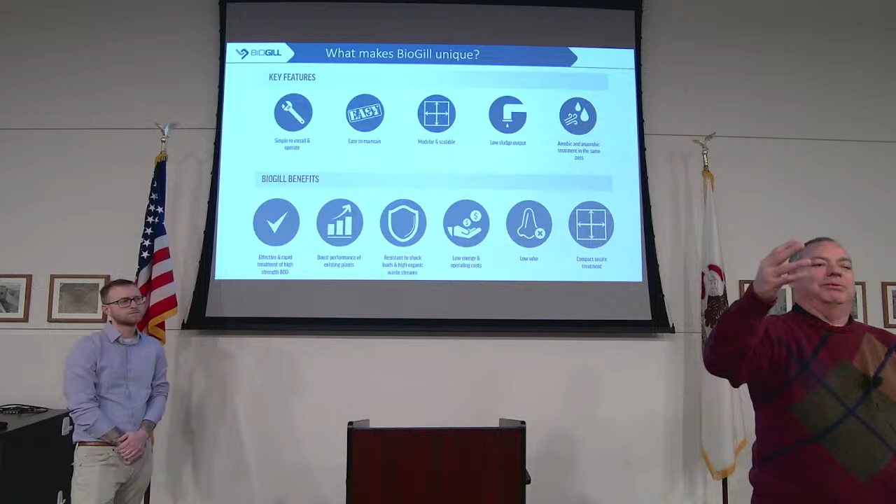Again, we're doing aerobic and anaerobic treatment in the same pass, very effective and a rapid treatment of high-strength BOD. It boosts performance of existing plants and is resistant to shock loads. If you shock it, as I said before, and kill all the bugs, you hose them off. In 5 or 6 days, nature will re-bug it, putting all the microbes back in there. Or you can get a bucket of microbes and dump it in the top.

It's also fine if you isolate it. If you're in a system you're not using all the time, you can cut off your influent water, cut off your effluent water, just let the water recirculate, and every 2 to 3 weeks pour a cup of molasses on top. That'll keep the bugs alive. It's resistant, very low energy and operating costs, which I'm going to show you in a second. Very low odor and very compact on-site treatment.

The numbers are pretty impressive, and we offer it in a single cartridge. Then we have Max 2, which is 2 cartridges. Max 4 is 4 cartridges. Max 6 is 6 cartridges. And an Ultra is 10 cartridges. Then you can stack those up and add them together.

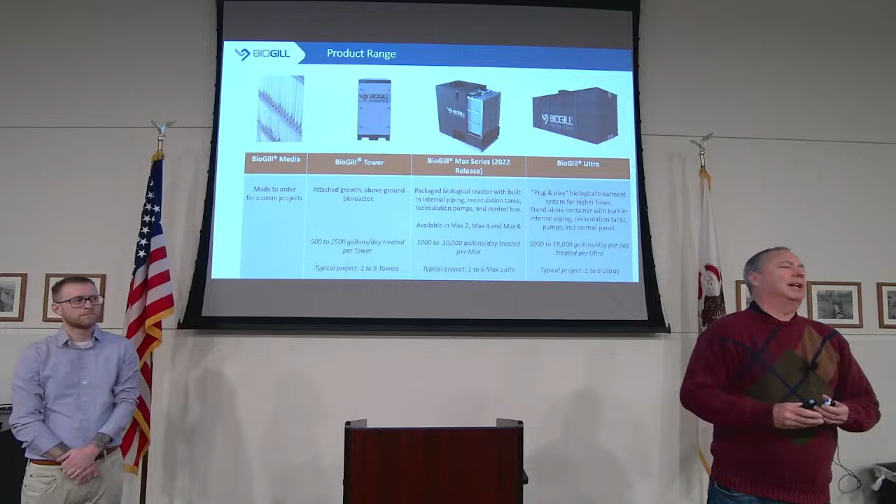We're working on a project with one of his contemporaries at GasVoda for a plant that does 150 to 160,000 gallons of water a day, and it's 15 units. So very, very scalable - from a small brewery or a mobile home park with 30 units up to 190,000 to 200,000 gallons a day. We can scale up.

Very similar to John Tao's product, this is something you can put in an existing system to help lower BOD and COD significantly. So if you have anything coming into town, your pre-treatment coordinator can say, hey, I need you guys to put this bio unit in before you discharge to us. It's a very simple fix.

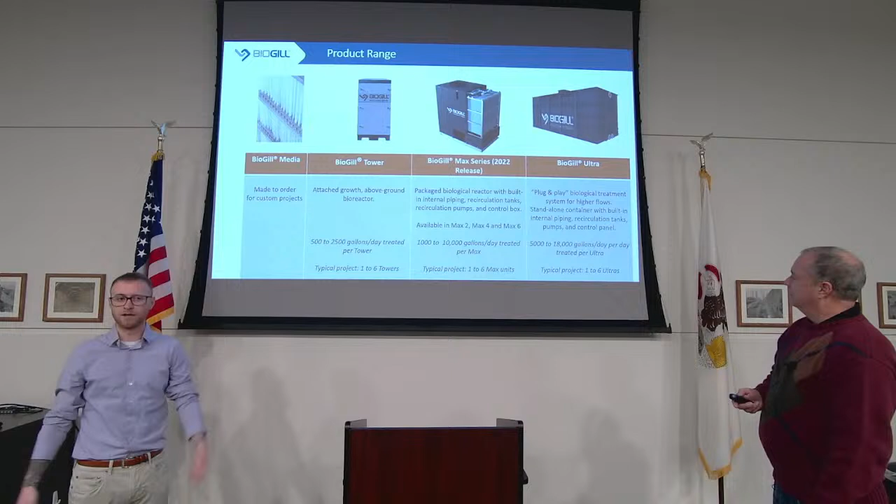So we're looking at around 18,000 gallons - between 5,000 and 18,000 gallons a day, depending on the strength of the water - for our largest unit, which is the Ultra there. Any more questions?

We're good with ammonia, we do nitrification. The bugs turn it inside their bodies into a form of nitrogen, and when they die, it's released back into the atmosphere as nitrogen. We would need to know your inlet ammonia and your goal for the outlet ammonia, and we can give you a prediction. Although it looks like an off-the-shelf product, we do engineer all this and build to order, so it's not literally an off-the-shelf product. Ammonia is not an issue unless it's ridiculously high - then we'd want you to do other treatments. But human waste ammonia, things like that, we do a lot of meat processing plants and pig farms where there's a lot of ammonia. We don't have issues with it.

Great question. Here's the HydroSwirl.

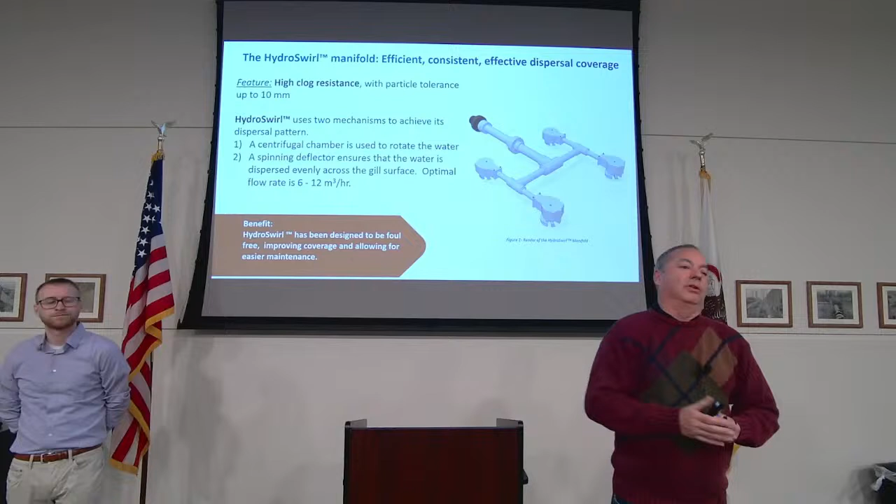What's the control panel? On the smaller units, the control panel is just pump on, pump off. On the Ultra, it controls your pH balancer, gives you readings from your sampling meter, controls the pumps, and has 3 auxiliary inputs in case you want to add a flow meter or some other device.

We've got the 2 pumps in the recirculation tank, but you may have a pump upstream pumping to your EQ tank. It'll also control your pH balancer, and you may be pumping the effluent somewhere to reach a sewer drain. So we can control 3 other inputs, your pH balancer, and 2 on-off valves. On the bigger units it's necessary; on the smaller units it's just on-off for the pump.

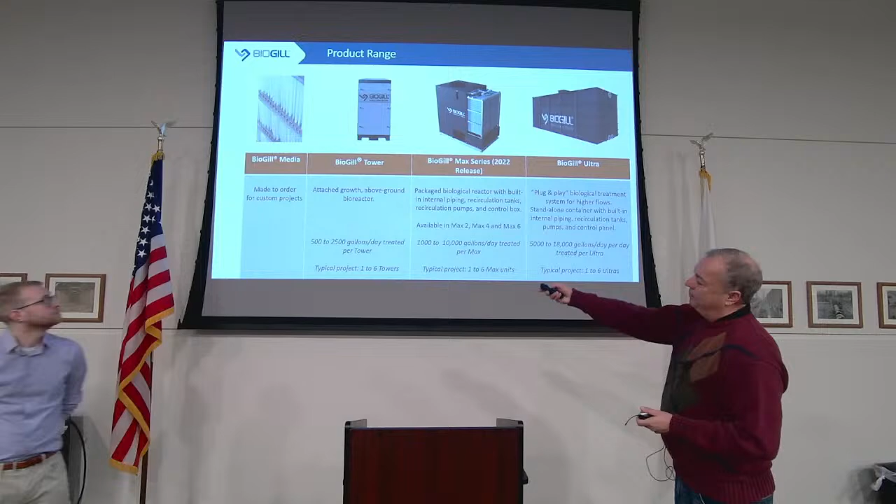Our smallest unit uses a 0.5 horsepower pump. But that smallest unit could still do 500 to 2,500 gallons a day with a 0.5 horsepower pump.

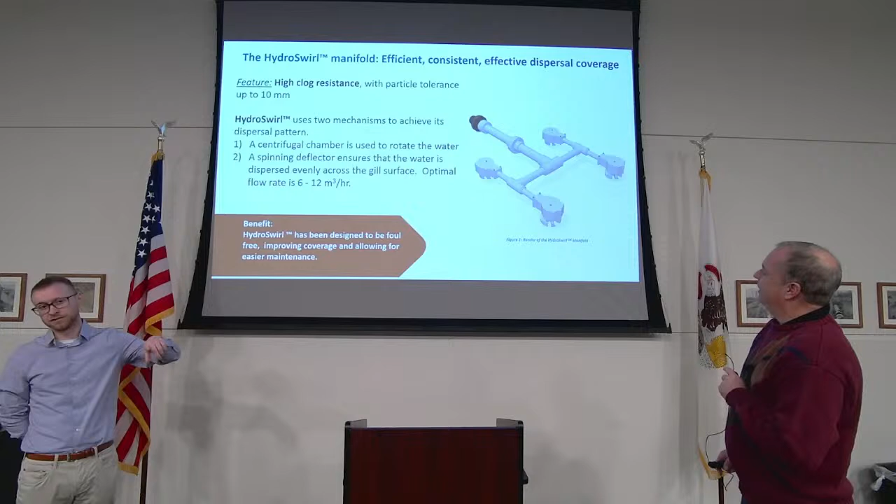This is how we spread the water evenly over the gills. No, we've never had one of these clog in the field. Yes, that's a patented HydroSwirl device. To this day, they have not had one clog at all. Very impressive, and it uses water pressure, no electrical draw here either.

And because of the low electrical draw, we found, like in China, we do a lot of work with very rural communities that never had any type of wastewater treatment. The China Health division, whatever branch of the Chinese government deals with health, is trying to fix that. So we could put these in a small community with 20 units, pipe all their human sewage to the BioGill unit, and run it with a solar panel and a battery, for communities that don't have electricity.

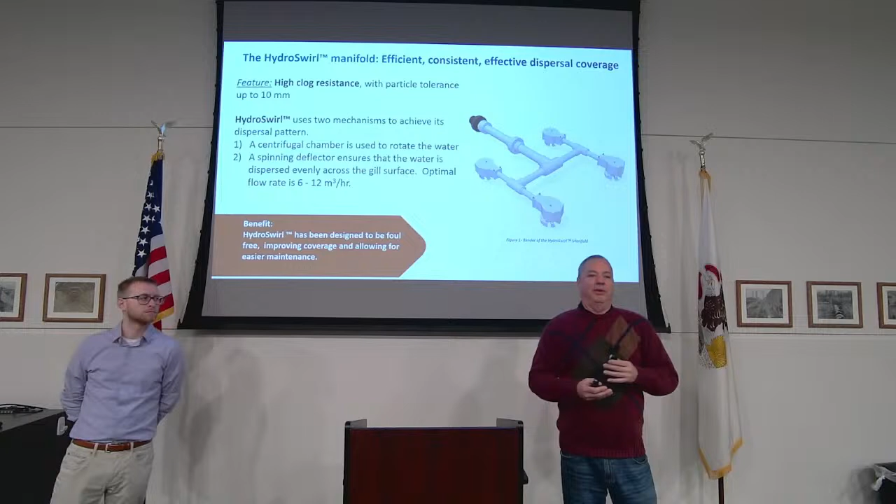Same thing with national parks built in the 30s, 40s, and 50s that don't have good sanitation. We could go into national parks where they have public toilets and clean the water before discharging it back into the river, down to a reasonable limit, instead of putting raw human waste. Many national parks have rainwater, shower, and toilet systems, and when you flush, it goes right into the park's water system because that's how they did it in the 30s. So that's becoming a good area for us.

This shows a tower, our single unit. Again, for sewage waste, up to 13,200 gallons a day. You can see the size of this one: 88 inches high, 45 inches wide, 45 inches long.

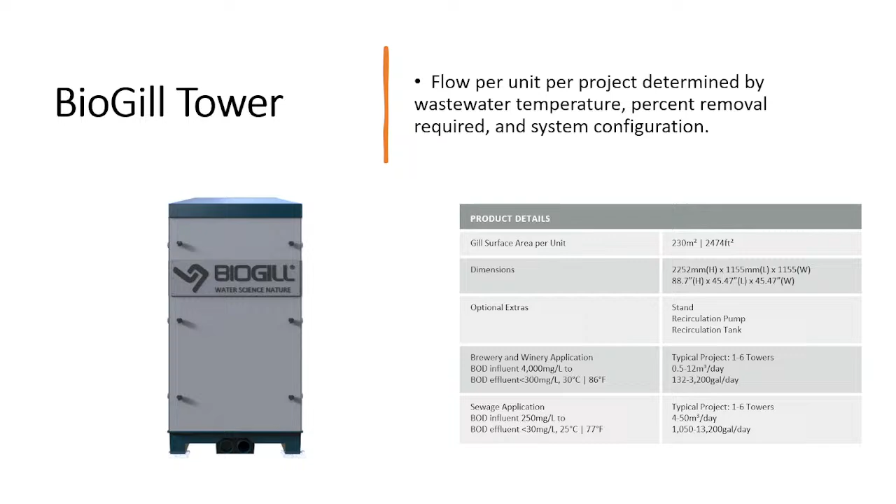If you're in a brewery or winery with high-strength water, 4,000 BOD or higher, we can still handle 3,200 gallons a day, and we can handle very high-strength water. We have applications like distilleries with very high-strength water, up to 16,000 BOD. We have no problem handling that. It takes a little longer and a bigger unit, but we're able to get their discharges well below 200.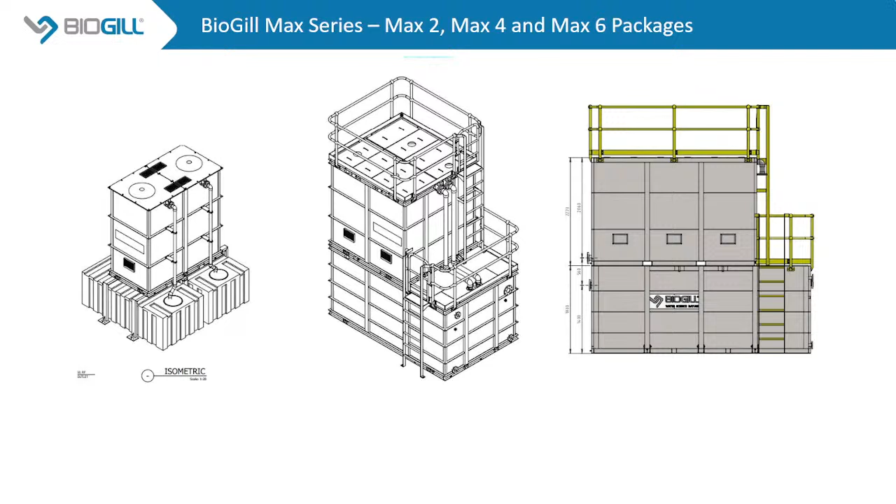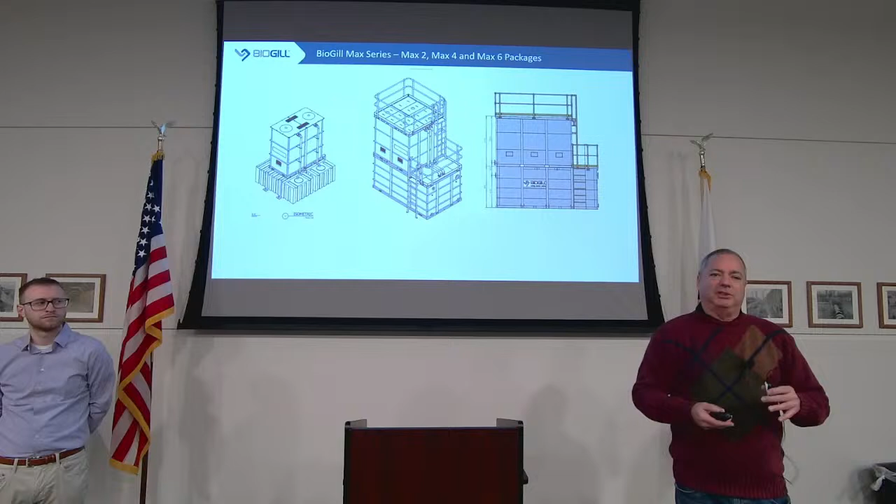We have a company called Gen Foods. They make food, do all kinds of fruit processing, and private label a whole bunch of jams and jellies. They're at 120,000 gallons a day, and they're putting in 12 of our Ultras with a giant precast tank. The savings to them from surcharges and electrical bills, compared to everything else they looked at, was in the neighborhood of 180 to 200,000 dollars a year just in electrical bill savings.

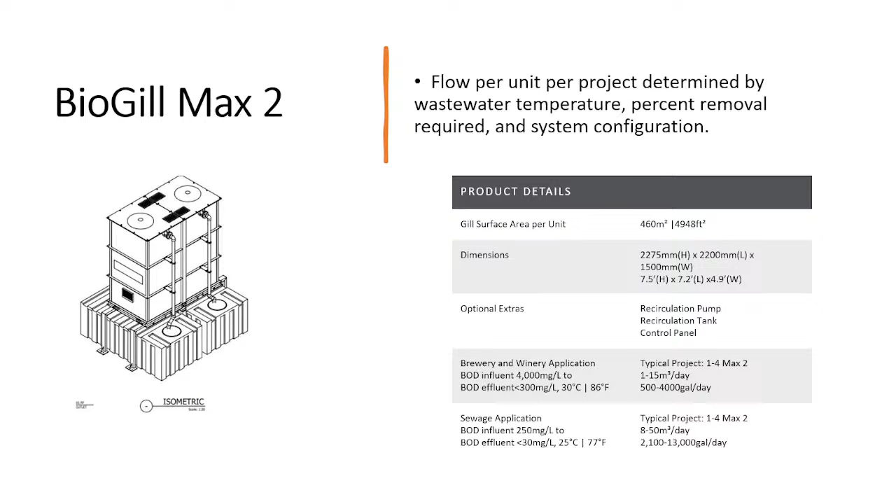I won't go into great detail for each one, but like the Max 2 here, in a high strength 4,000 BOD application, we can still handle close to 4,000 gallons a day. In a sewage application, this little guy, 6 feet high, 7 or 8 feet long, 7 feet wide, handles up to 13,000 gallons a day. Perfect for a trailer park, mobile home park, or a small community addition, if you don't have the capacity in a small town and a developer wants to bring in 50 new homes.

In the Max 6, in human sewage, we're looking at up to 45,000 gallons a day in an 11 foot by 7 foot by 7 foot footprint. And in high strength water, up to 11,000 gallons a day.

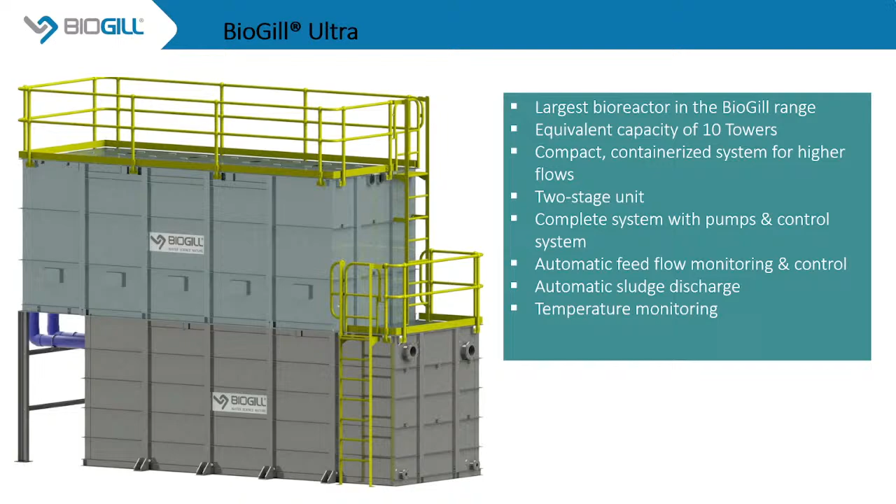And then this is our Big Daddy, the Ultra. It's our largest reactor, 10 towers, but still compact in size. It's 2-stage. We run the water over 5 units, cleaning it, then run the reduced BOD water over the other 5 to get our effluent. We have complete system control with pumps, automatic feed flow monitoring and controls, automatic sludge discharge, and temperature monitoring. It's basically a sewage plant in a box.

It does have a pH adjustment system as well. So if you did have a pH issue, this does have a restricting system to keep the pH in balance.

And this guy, one unit, depending on the variables, we could get up to 95,000 gallons a day in sewage and up to 15,900 gallons a day in high strength water. It's pretty impressive.

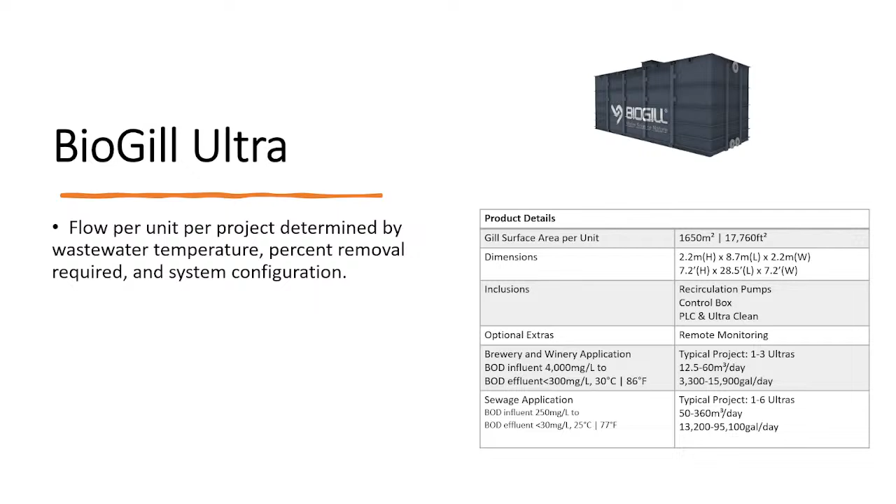We have a number of markets: sewage, aquatic, maritime, aquaculture. Food and beverage has been primarily what we've done in North America so far.

And I have some, I'm not going to go through these. I want to go through the... where'd Mark go? Is that Mark? Oh, he was going to switch it over to the PDF for me. He can hear you, so you might. Okay, well hopefully he does. While he's coming, I'll show you a small application. Now up north, these guys produce a lot of heat. But up here, you would need them to be in some type of enclosure. It doesn't have to be a brick, nice building. It could be small, there he comes.

We have them in a basement in a winery in Canada. And in the coldest part of the year, with no heat on, the basement temperature stays around 87 degrees because of the heat these guys produce.

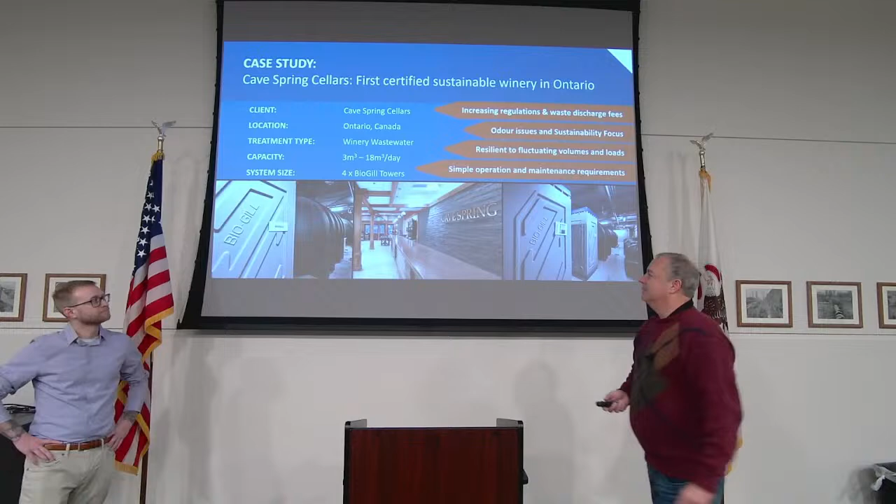Any questions while we're waiting to get the PDF switched over? You say it handles FOG real well. Very well, yeah. Does that reduce your capacity? No, well, then we're going to make you screen it, so the big clumps have got to come out. But no. The reason being, the gill draws the FOG through, draws the fat and grease to the dry side, so it's not suspended and the bugs aren't having to deal with oil and water not mixing. There's no water on the dry side, so they're getting gobbled up quite well.

Whatever your personal feelings about the environment are, it's a very big issue for a lot of people, governments, and municipalities. Walmart recently started requiring their vendors to do something sustainable in order to keep selling their products at Walmart. Sabra Hummus went to Walmart and said if we put a BioGill system in to clean our water, which would reduce their carbon footprint by 683%, would you consider that sustainable? Walmart said absolutely. So I'm going to give you an example.

We ran some numbers, and the project outline was an inlet BOD of 4,000, an outlet BOD of 300, with a flow rate of 12,000 gallons per day. We assumed 8.5 cents per kilowatt hour, which is actually higher than that now, a labor cost of $35 per hour—though if you're required to have a level 1 or level 2 operator, that's going to be closer to $50 an hour, which you would never have to have with us—and then a capital cost based on information we got from our different distributors.

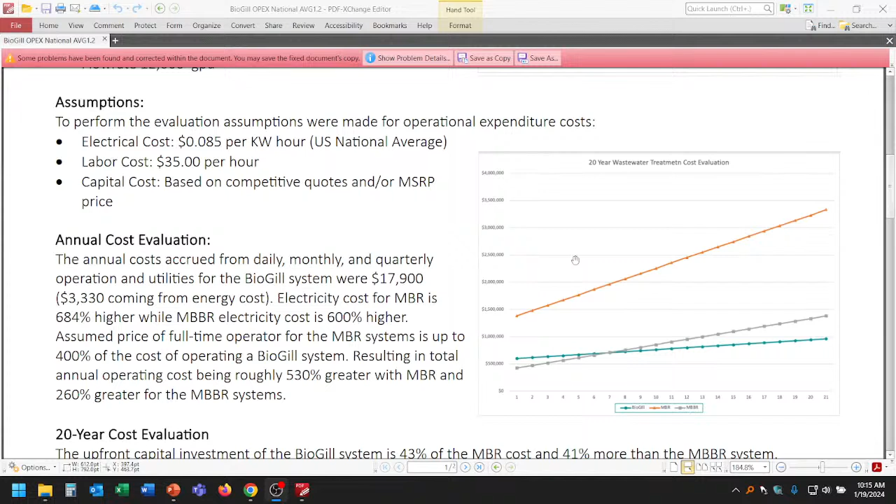I'm going to show you the breakdown, but we did a 20-year cost evaluation, and we compared ourselves to an MBR and an MBBR. And this scales, right, so in a larger system the numbers are going to be much bigger. Over a 20-year period, the amount to own and operate an MBR and an MBBR system is—it's about $2,371,000 cheaper to own and operate our system than an MBR, and about $500,000 cheaper than the MBBR.

And actually, we're going to revise those numbers because we inflated our labor numbers and deflated their numbers. That's a significant amount of money. And scroll down for me again.

But the bigger thing, keep scrolling, it's right here: 684% cheaper electrical usage. So if a carbon footprint is important to you, or to your client, or if you have somebody coming in who's all about being sustainable, being green, being eco-friendly, we're the only game in town for that.

This is for one unit, one ultra. Our energy cost for one ultra is about $300 a month. For the same flow, same strength water from an MBR, it's $1,900 a month. And for an MBBR, it's $1,700 a month.

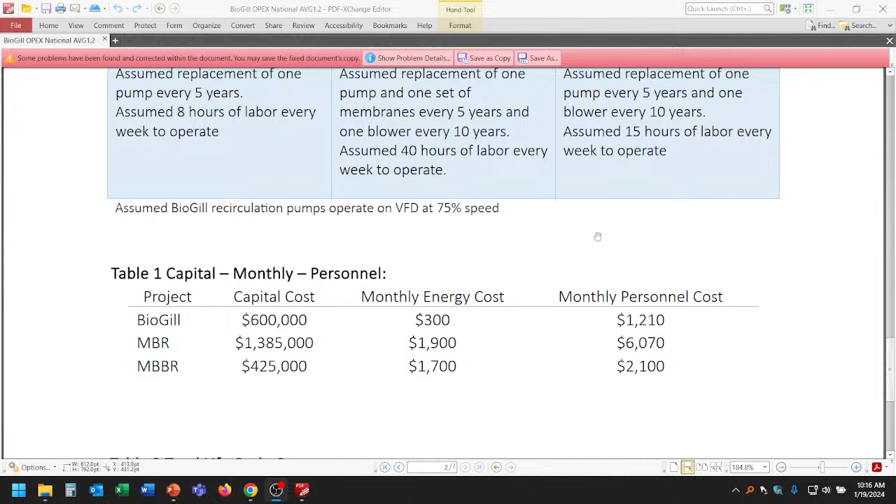Now when you scale that up, like the project at Gen Foods, which is 12 units, $1,600 a month is about $20,000 a year. Scale that up times 12, that's $240,000 a year lower electric bill and smaller carbon footprint.

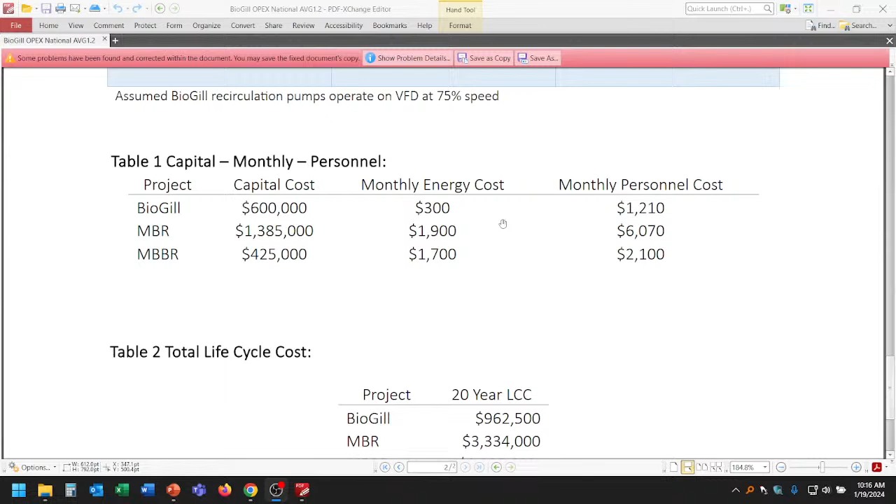And we even have a program called the BioGill Clean Water Partners. If you use BioGill, you get certificates saying you're an environmentally friendly company, in the clean water and low carbon footprint category. So it's important to a lot of people. If it's important to your clients, your communities, or internally to you, we're the way to go for low carbon footprint.

And that's a lot of real money too. Saving Gen Foods $250,000 a year on their electric bill was a significant buying reason for them.

So, any questions? Paul? And again, sorry, I'm hoarse. It's your fault for being so cold up here. Any questions on this? No?

Okay, well I'm going to give you two more quick things. I forgot. Our nano ceramic material, which China's space program is actually looking at, is incredibly tough. Yeah, I've tried to cut it before, you can't cut it. It's a 25, 30-year material. We give you a 2-year warranty on our units, which are now made out of stainless steel and metal. That BioGill sheet is a 25, 30-year sheet.

It's a 25-year solution. On any installation we do, we have a 100% performance guarantee. So if the inlet numbers you give us are accurate -- if you tell us this is our TSS, this is our BOD, this is our flow rate -- we will do a calculation and guarantee what will come out: your TSS, your COD, your BOD.

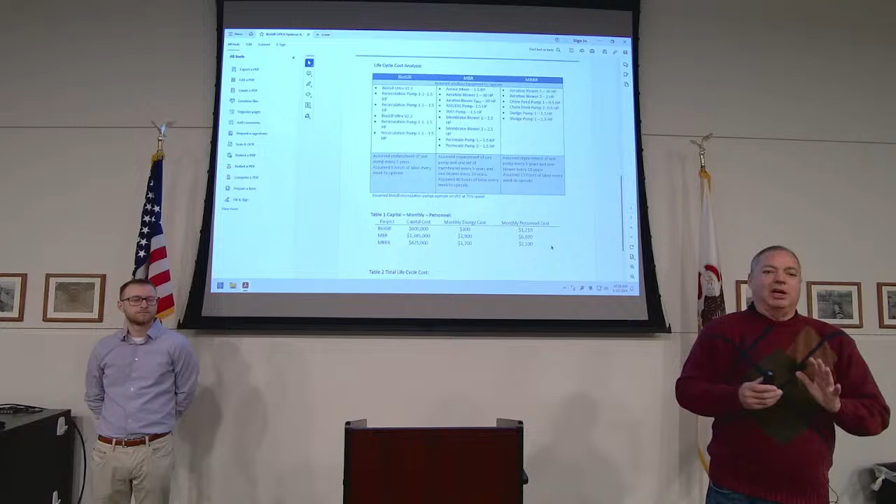And if it's not, as long as your inlet numbers haven't changed, we will come out at our cost and fix it until it does, however many times it takes -- if it's 3 years down the line, whatever -- and make the outlet numbers meet or exceed what we promised you, at no cost to you. 100% performance guarantee. We're that confident in this product.

And we have them all over the world. It's working. It's a new technology, but it's tremendously good at removing BOD in a small footprint with almost no energy costs. Hunter, you want to add anything?

No, I was just going to say, to summarize: that was a low carbon footprint system, a new system, very good with BOD, COD, low monthly cost. You don't need a licensed operator to maintain the system.

Overall, good. Hunter actually has a project he's working on currently where a very large manufacturer's aeration pond has gone septic and isn't working anymore. They're spending, we were told yesterday, $80,000 a month on electricity trying to blow oxygen into it. And we believe they're going to go with our solution.

They want to -- which would be, we would literally pipe water out of their aeration pond through our units and then back into the aeration pond. We'd greatly reduce the BOD, and once we start doing that, they can start cutting off blowers and aerators. So we'll save the pond and massively reduce their electric bill.